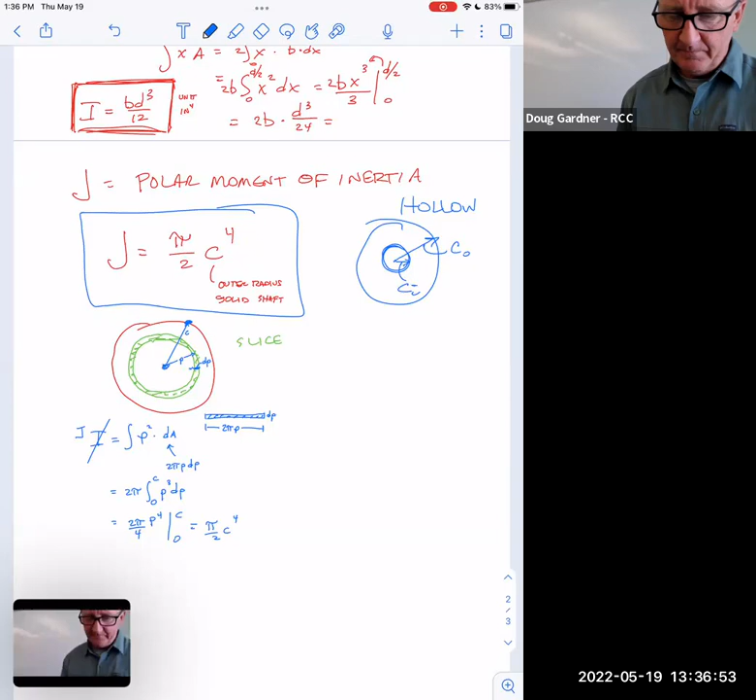Let's start. Now, armed with those two formulas, let's see if we can get some problems correct.

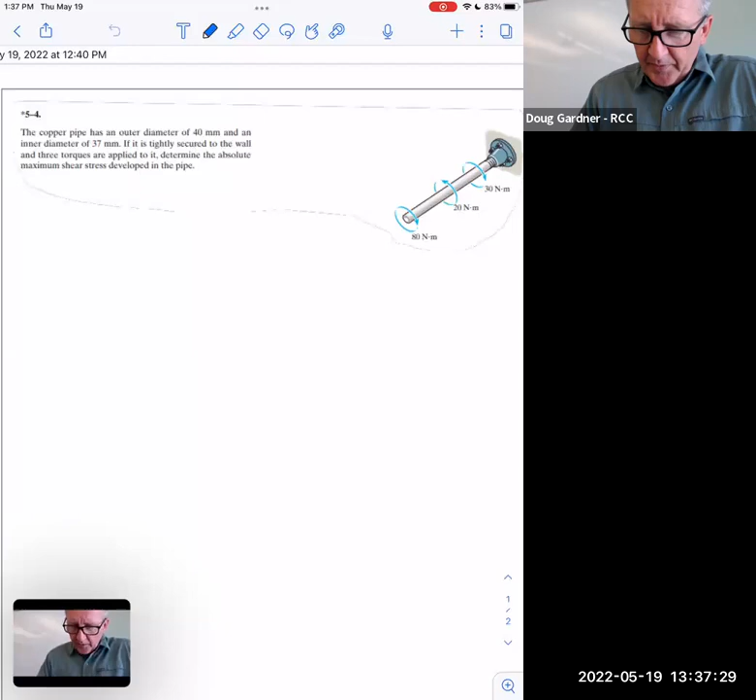So you have this one in front of you. The copper pipe has an outer diameter of 40 millimeters. Notice it's like a pipe screwed into the wall, with an inner diameter of 37 millimeters. It's tightly secured to the wall, and 3 different torques are applied to it. Determine the absolute maximum shear stress developed in the pipe.

Now, again, at a glance, doesn't that look weird? How would there be 3 different torques? I can imagine somebody putting a pipe wrench on it somewhere and torquing it down, but how would you have 3? Are there 3 people competing with each other? Well, we can argue about that, but whatever—let's stare at the sections of this.

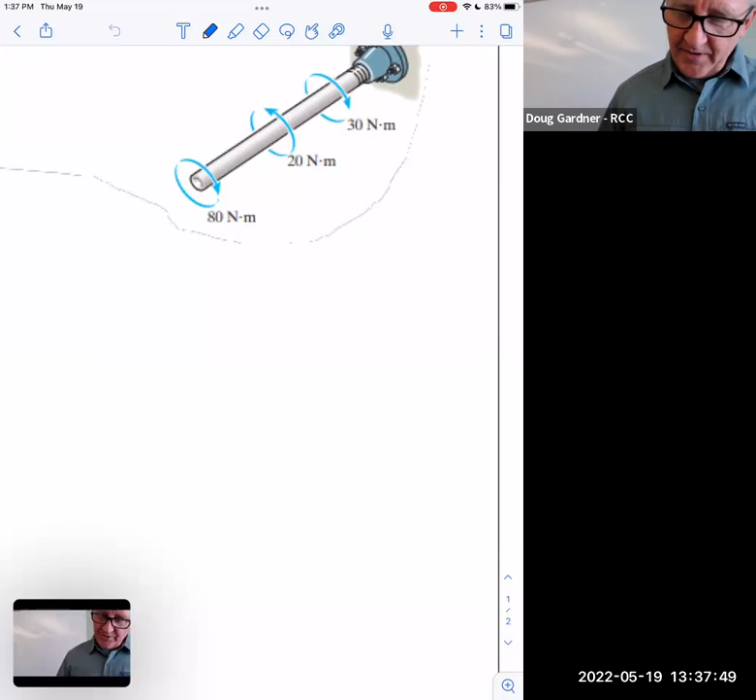Would you agree that everything in here is 80 from the previous section? If I section just that part, all of the metal that's in there thinks it has 80 on it. Do you agree with that? But what does this stuff think? What do those people think?

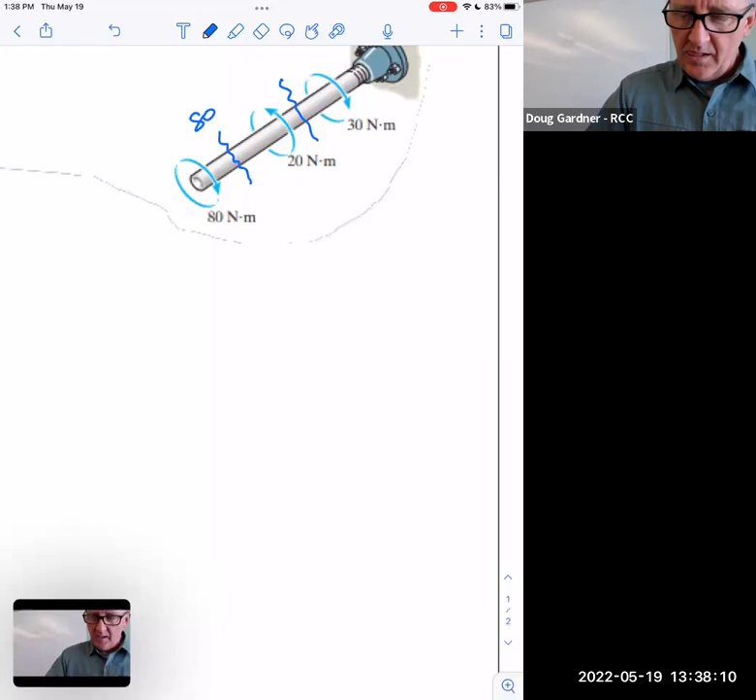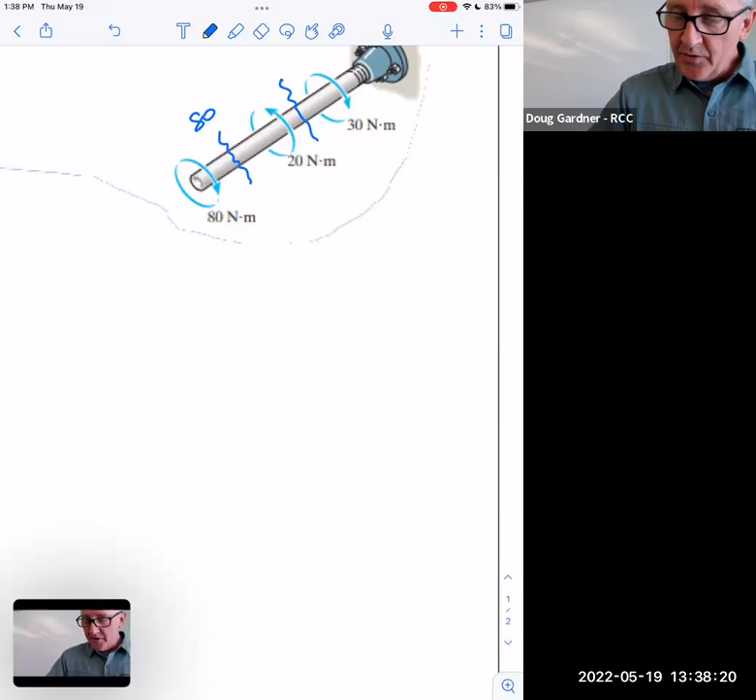Like, 80 minus 20, yes. Notice they're going opposite directions. If they're going the same direction, it'd be 100. If they're going different directions, it's 60. So actually, that part of the pipe isn't wanting to twist near as bad, right?

And then what about the one at the end? What about this last section over here? What's it think? 90. 80 minus 20 is 60, plus 30 is 90. So notice that section actually is the one that's going to break. Does that make sense? If you twisted it hard enough that the metal just went and folded, that's where it's going to break. Do you agree with that?

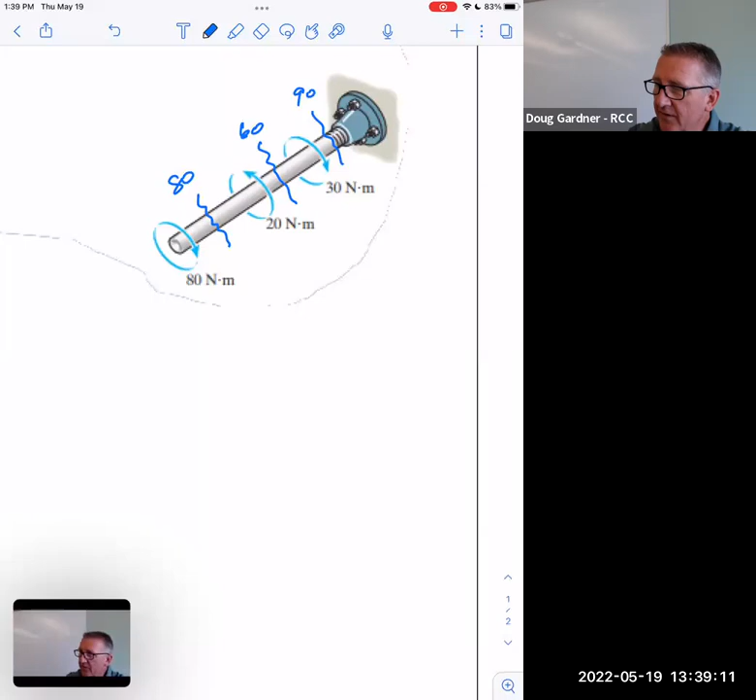So when I was looking at this, I just kind of assumed this pipe was going to have different values—like in between the 80 and the 20, that pipe, the inners were going to have like 60, and then in the 20 and the 30, it would have like 10. I thought the pipe was going to act differently. In other words, the 30-20 area doesn't know 80 exists. And that's not obvious at all—I could totally see that being the case. So the pipe kind of acts as one, but because it's connected, it is working its way through over there. So yeah, that's not obvious at all.

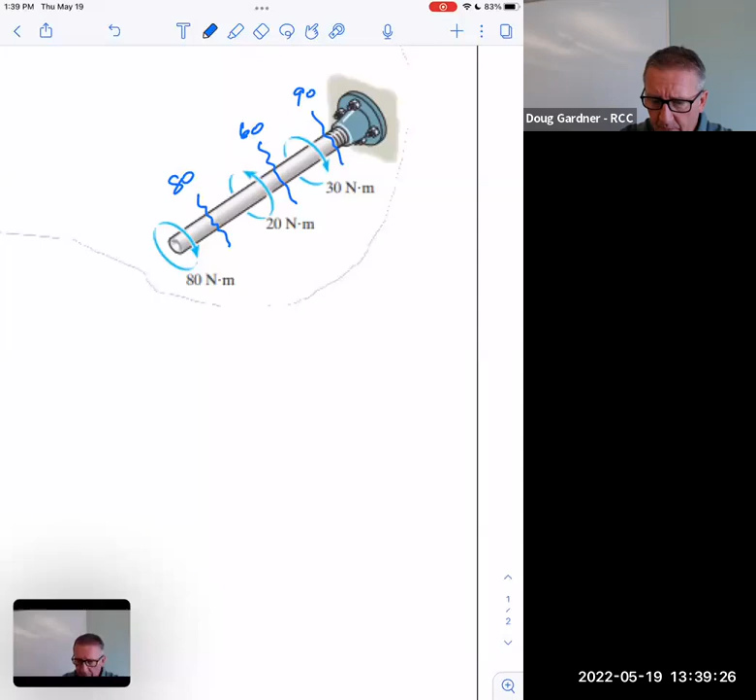So notice what it asked. Yeah, that's exactly right—because of that, it's going to break somewhere in here. Now, assuming the threads made it skinnier through there, you'd think it would break where the threads are. Does that make sense? Because the radius of the pipe is actually kind of screwed up in that section. They're asking us to ignore that. But if it's going to break, it's actually going to break somewhere in here, because it's the same pipe all the way through, and that's the place that has the most torque on it.

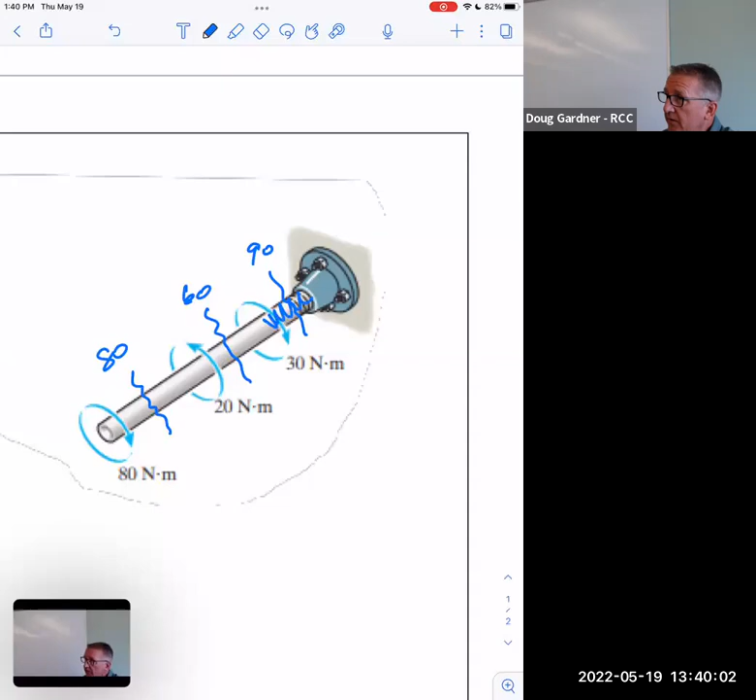So kind of like a gruesome thought, but I was just thinking if you held your arm out and someone twisted it this way, that way, exactly—this way, it's going to break at your shoulder. That's weird, I just wouldn't think that. I don't want to think about it. Well, think about it—no, that's good, because basically you're out here doing 80, right? And your shoulder is wanting to break because it is fixed there, right? Now, is it going to break? Do you see how my arm is able to rotate without my shoulder changing? That's exactly what material can do. Good, it didn't break over here.

It's good this wasn't super rigid, right? Don't I want this to be nice and rubbery if I want to bend this? So notice it's having to twist to do that. But if I keep going, at some point it is going to break, right? Where is it going to break? Where it's attached. Okay, that makes sense. So it doesn't matter how many extra forces there are, the overall force happens at the attachment point.

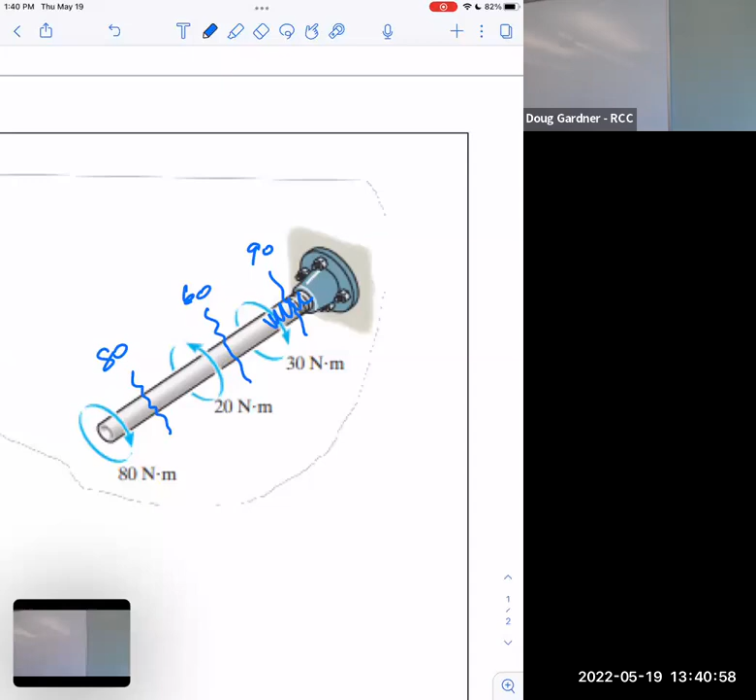So if I'm over here and I'm about ready to break your arm or whatever, then somebody else comes in and says, isn't that helping? Your arm's about ready to break off, and somebody comes and says, now this isn't going to break—because I'm pulling back, right? So now it's only 60. It was 80 and 20 got released. Now it's only 60. Ooh, it feels like relief. Now, could it break in there?

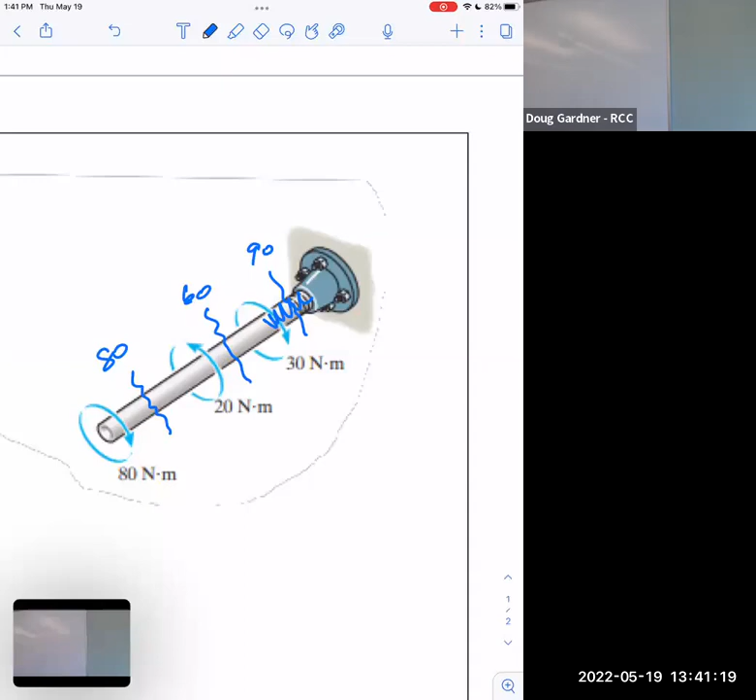Sure, yeah, that's what I was thinking. I thought it would break right here, between the 80 and 20. There's a part of me that looks at that and says, isn't that 100 then? Because it's like, if it's 20 going one way and 80 going the opposite, it felt like 100 on my arm. It felt like it was more. Like that doesn't feel good, huh?

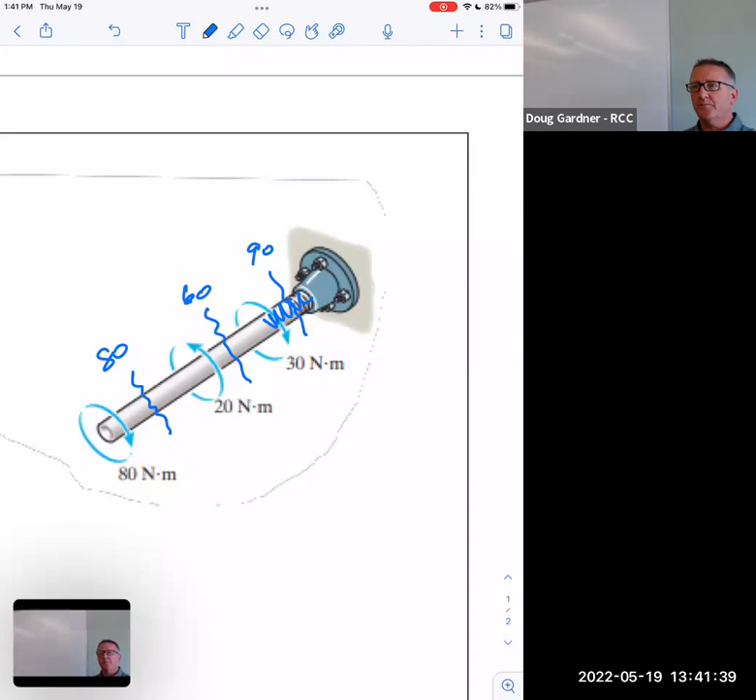Yeah, but then if you just like... Yeah, well, I know, but it's less. Okay, I'm sorry, that makes sense. No, this is good. This is exactly what we want to do. We want to reason about this.

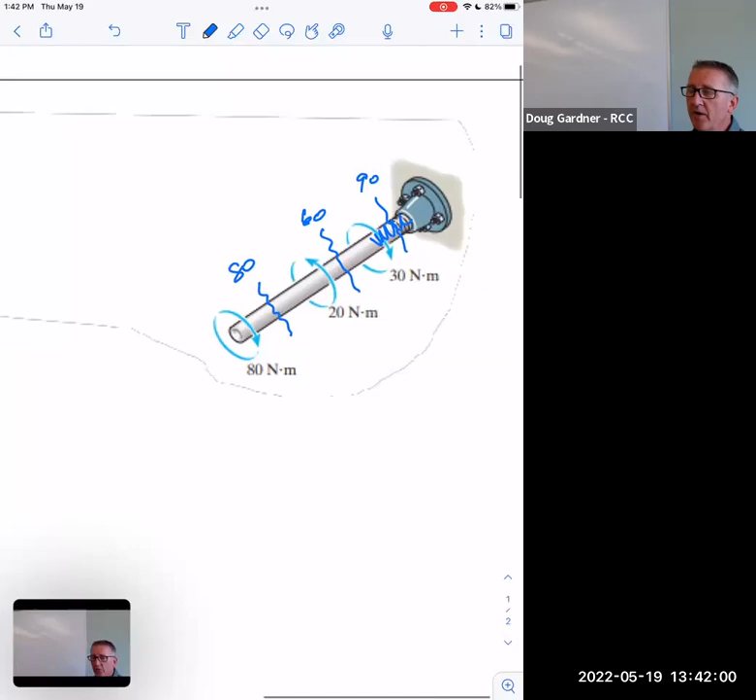Because this said here, the key word is maximum shear stress, then we have to look at this pipe and say, well, where's the biggest torque possible? Remember, our formula is just that the shear stress is equal to torque times C divided by J. And they only wanted the maximum. They didn't say, I want all of them. They just said give me the maximum, which makes sense because the maximum is what's going to cause this to break, right? So because of that, I only have to do the 90 because it's the biggest one there.

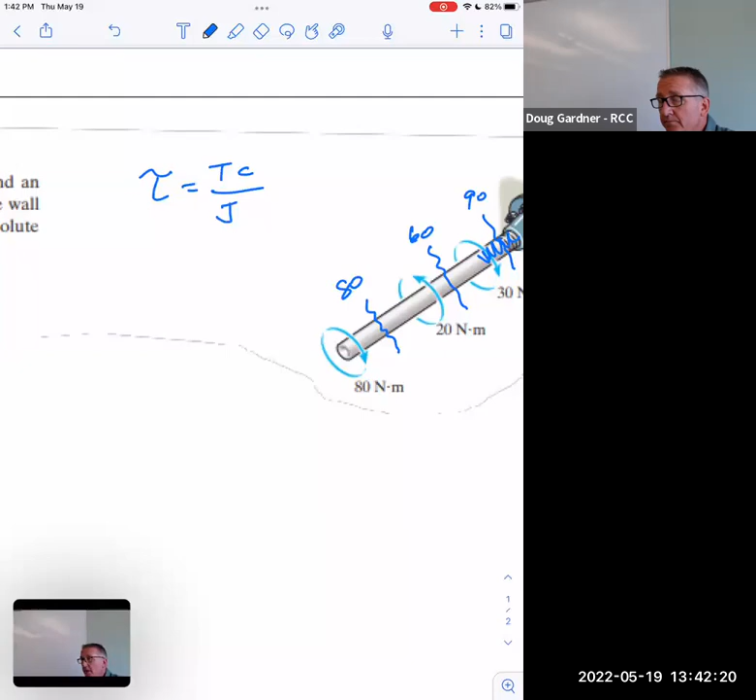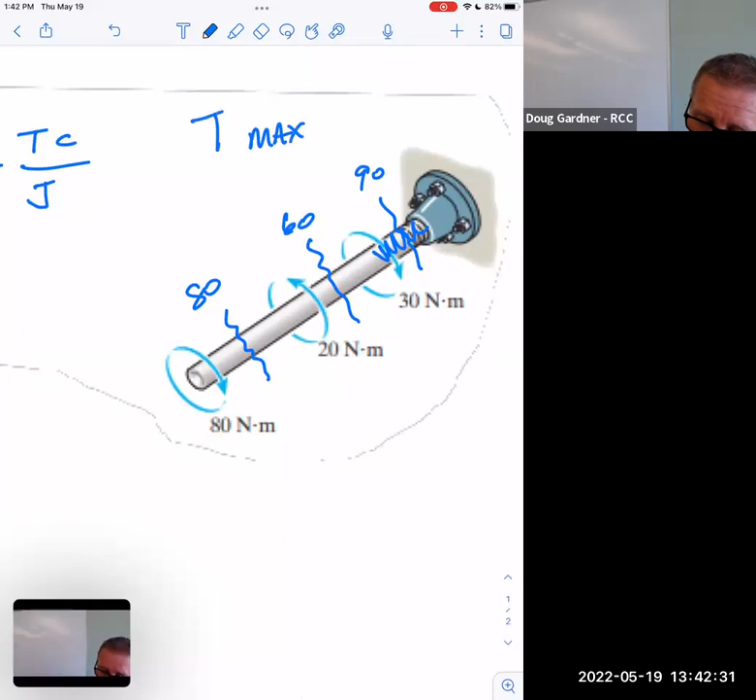So I'm making a note to myself. This is the T max based on the sectioning concept.

And I am interested that you see this as the same thing we did before. Before we were sectioning up our pipes, but it was always axial forces that were pushing and pulling on it. Well, it's the same thing here. It's just now they're twisting forces that are pushing and pulling it, but we're still having to section it to see what's happening to each chunk.

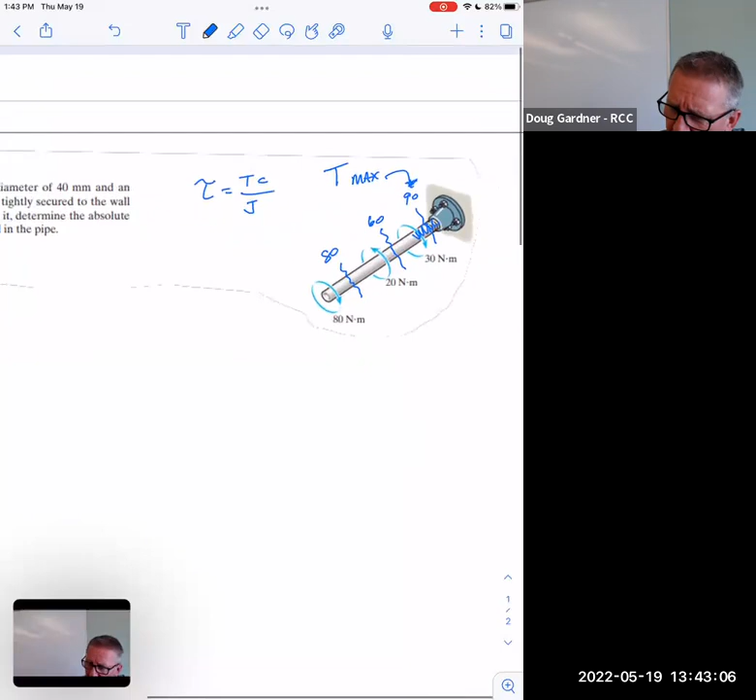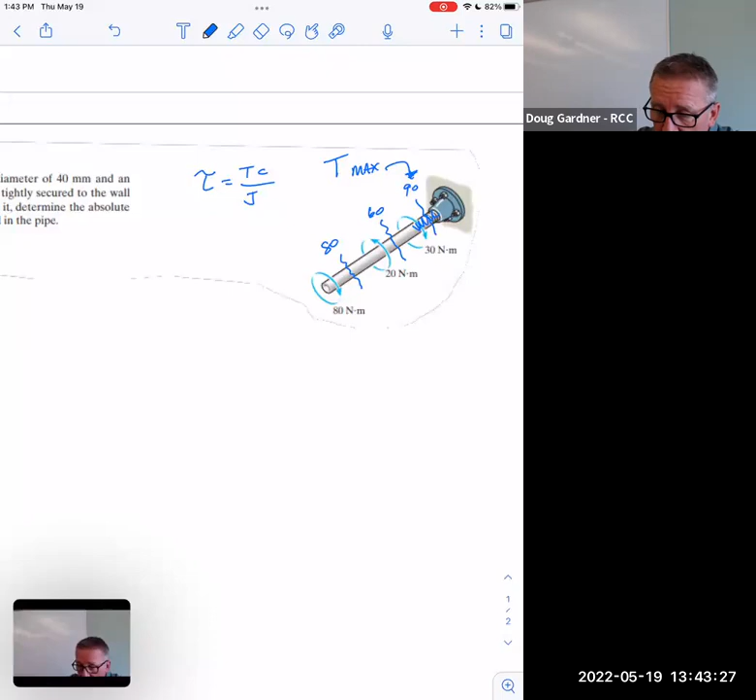Is that PSI? No, I'm sorry, what's the units of that? Love it, wonderful question. So because it's torque, what do the units have to be? Torque is a force times the distance, so it's either Newton meters or foot-pounds. In this case, I see metric, so it's Newton meters. That makes sense because it's a force times the distance. So I don't know what the force and the distance are because they just already multiplied it out for me. They just told me it's 30 or 90 or 60 or whatever.

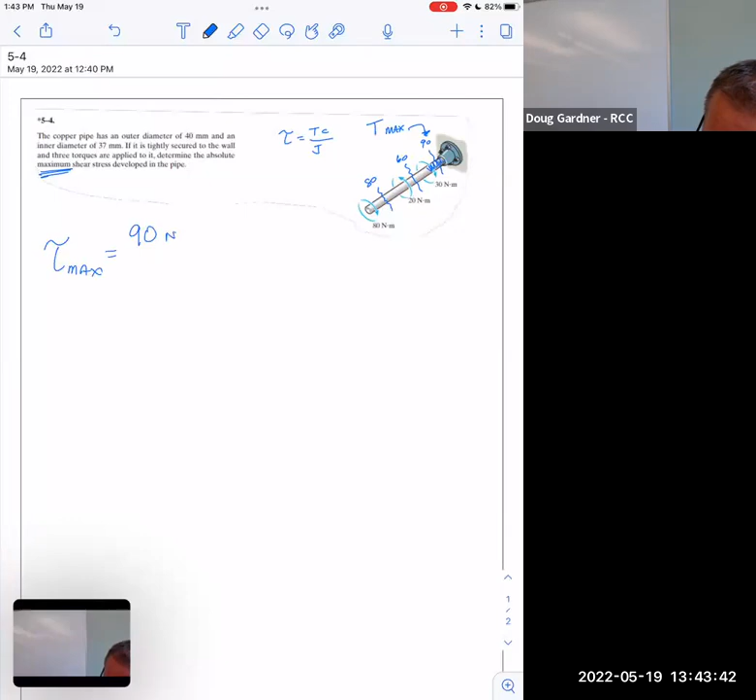Okay, so because I'm after max, then cool. Notice the formula says tau max is what this formula is designed to do. So I have 90, and of course, because this is early, I feel like I better leave Newton meters in it to kind of see what my units will be in the end. So I have 90 Newton meters. C was, again, the maximum radius, right? It wasn't just any old radius. It was the maximum radius.

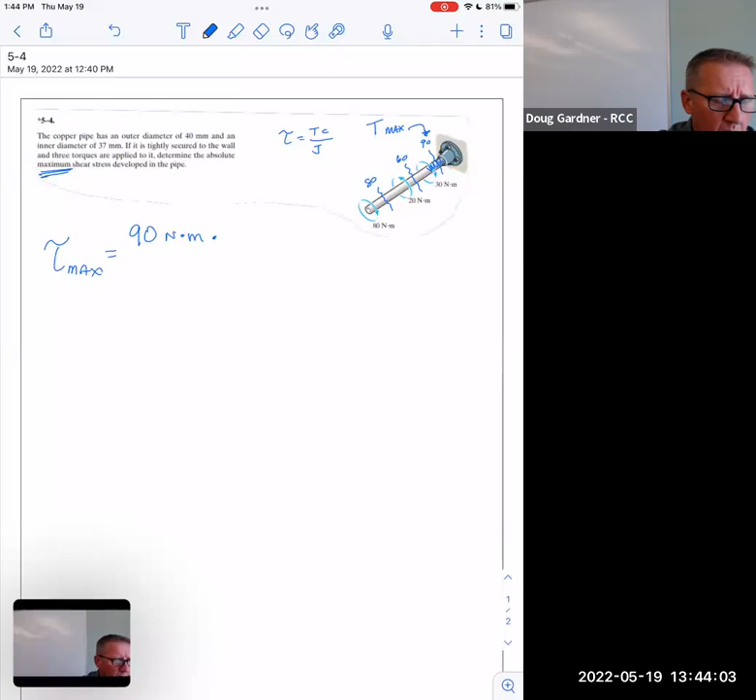That maximum radius, we were told, even though this is hollow, this is, well, it's not 40 because that was a diameter, but because the diameter is 40, then the radius is 20, right? And so even though this is hollow, that C is still a C. It's still maximum, it's the outer edge, because that's where the most torque is going to be, whether there's a hole in the solid pipe or not. So that's 20 millimeters. Now, again, should I leave it 20 millimeters or because the other one's in meters, should I turn this into meters? I'm not really sure, I think I'll just call it meters for now. We'll see if that was a good idea later on.

So I changed 20 millimeters to 0.02 meters. And then I'm dividing by J, right? But what is J? Well, in this case, because it's hollow, does it make sense we need that second formula? J, what is J? What is the second moment of inertia? What is this shape? What is this shape's desire to not rotate, if you will? It's pi over 2 times the outer radius, which was 0.02 meters raised to the 4th power, minus the inner radius.

Oh, that's terrible. What's half of 37? I guess that's 18.5. And then if I move the decimal point 2 places to the left, I guess it's 0.0185.

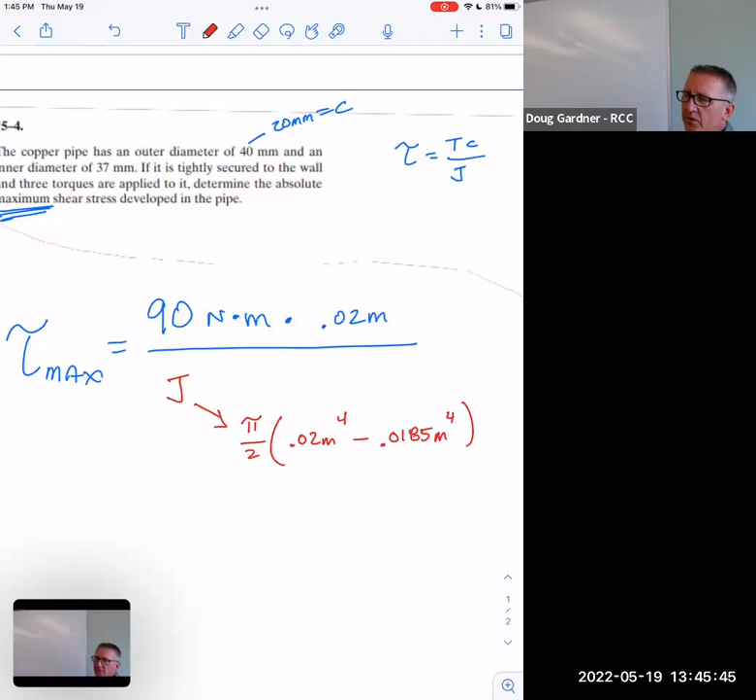Now, before we do this, though, stare at the units of this. Can you tell what the units are going to be? The bottom is meters to the 4th, the top is Newton meter meters. So what's the unit of the answer to this going to be? Meters squared, Newtons over meters squared. You agree with that? Because there's 4 meters on the bottom and 2 on the top. Do we have a name for that? Have we seen that before? Is it Pascal? No, yeah, Pascal.

This is clear back on your first notes, actually. PSI is pounds per square inch, so force on top, length squared on the bottom. In metric, force is newtons, and this is a Pascal. Since that's a crazy unit, somebody renamed it, but the units are newtons per square meter, which is just pascals. This is a unit we saw before, listed on your first note sheet back when we learned about shear stress in the first place. So that actually makes sense that that'd be the case.

Now all I gotta do is just punch those numbers in. 90 times 0.02. Again, be careful dividing by pi over 2, because that's really actually dividing by a fraction, so you're really multiplying by 2 over pi. It'd be easy to type this in wrong and screw it all up.

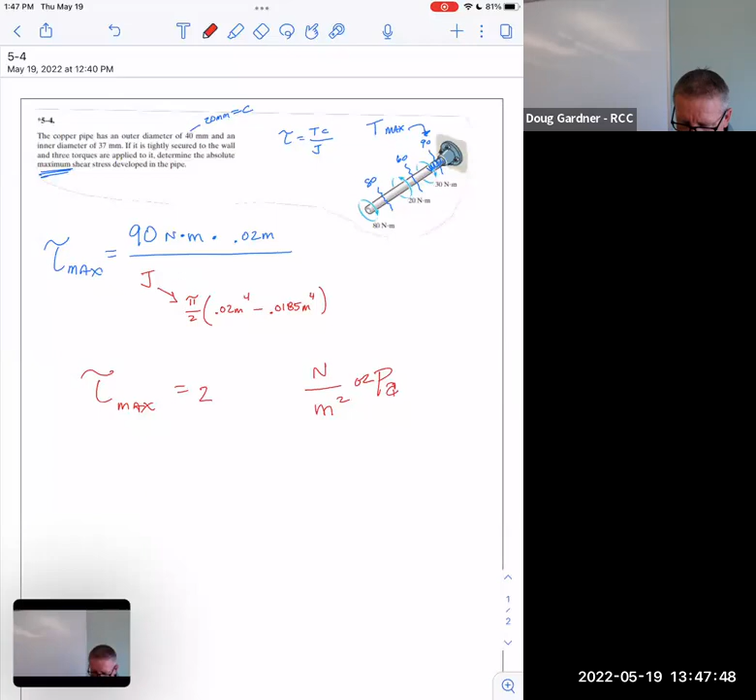If you don't get this wrong, you actually get... I guess I'm going to have to type it in because I wrote Newtons per meter squared. I'll give you a second to think about it. 90 times 0.02 times 2 divided by pi, divided by parenthesis 0.02 raised to the fourth minus 0.0185 raised to the fourth, close the parenthesis. I got 26733168.

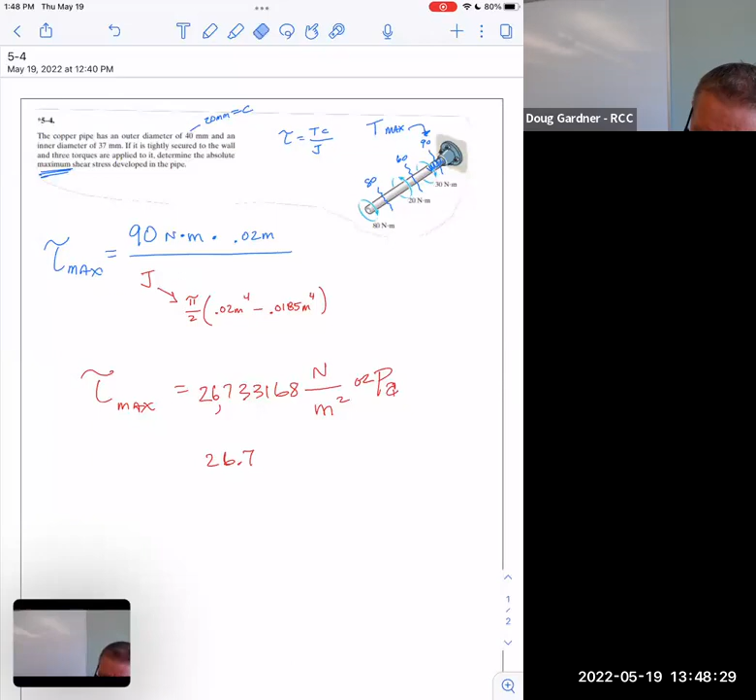What's the back of the book going to say for this? 26.7... oh, it'd be 26.7 megapascals. Is that it? Yeah, is that right? We're missing an 8, 3. I'm missing an 8, there was an 8 there. Yeah, so 26.7 megapascals. So we moved it 6 places, which was mega. That's what you'd see in the back of the book, but these are both correct, right?

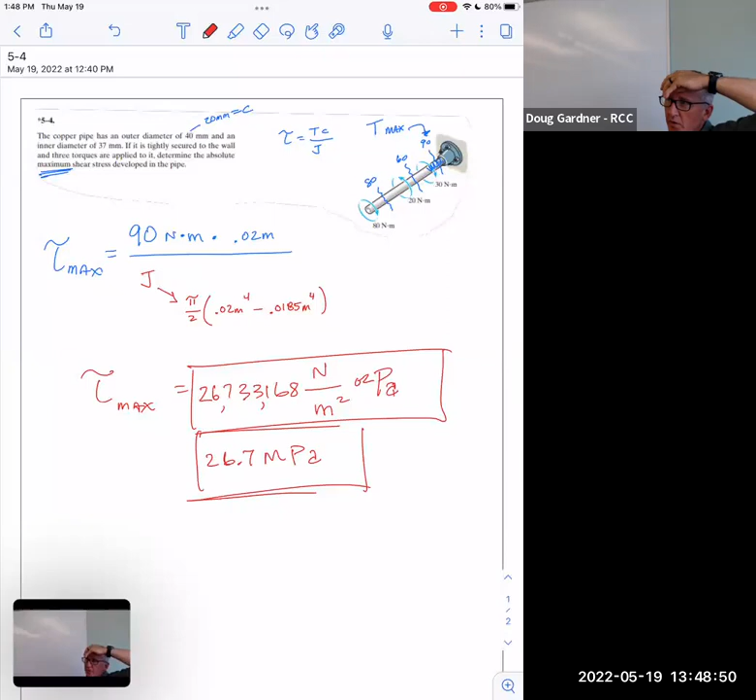Now, can you appreciate material? Because we converted this not to newtons, not to a force, but to newtons per square meter, does it make sense if this is something you could look up? Like how much, if you twist on something, how much torsion can A36 steel handle? Keep in mind, it doesn't even have to be torsion - it's just how much desire to slip one piece past another piece. How much of that can A36 steel handle? Is that something we could look up?

Interestingly, I think if you look in the table, it's not one of the options. Well, or it's an option, but there was nothing there. It would be shear, right? Yeah, it's like there's a spot for it, but they didn't put anything there, which I don't know why. I just discovered that today. I was like, what? Is that because it depends on the thickness, maybe?

I don't know. There's one problem we're going to do in a few minutes where they told us the value of that, and I thought, well, why didn't we just look that up? Because it said it was - I looked in the back and it wasn't one of the options. There was one homework problem that gave us a value for aluminum, but I was looking at it at the back of the book and it was a different value. I got furious because I was working on it for like an hour and couldn't get it right - because I used the one in the back of the book. Oh geez, yeah, that's super frustrating.

But the cool part of this is somebody put some twist on it, just like I did on Connor's arm, and of course it wants to break. So we took all of this and turned it into a desire for two pieces of metal to slide past each other. Keep in mind, just because it's rotating doesn't really change anything - it's two pieces of metal sliding past each other. It's no different if it's straight sideways than if it rotates. The only difference with rotation is the middle ones aren't doing any sliding past each other, whereas the outer ones are sliding wildly and the middle ones are sliding a little bit. But other than that, it's just metal sliding past metal, right?

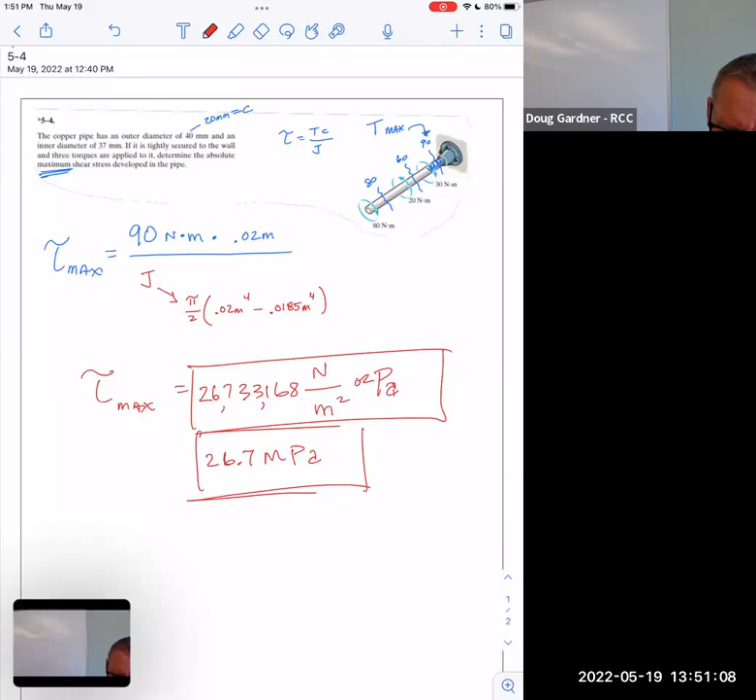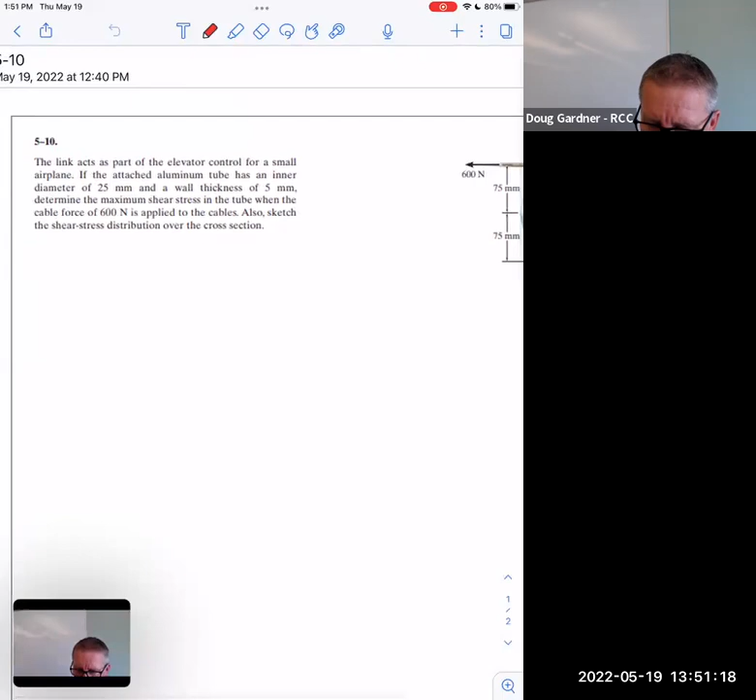Let's take a look at this one. This is exciting to me because this is a control for a small airplane. This took me a second to figure out, so let me highlight a couple things about the picture so you understand it.

Notice there are 600 newtons pulling in this direction on a cable and 600 on this. What is that accomplishing? Do you see there's a pipe right here? It's hollow, and by implication the pipe is kind of looking like that. So this is going to cause the pipe to rotate. Does that make sense?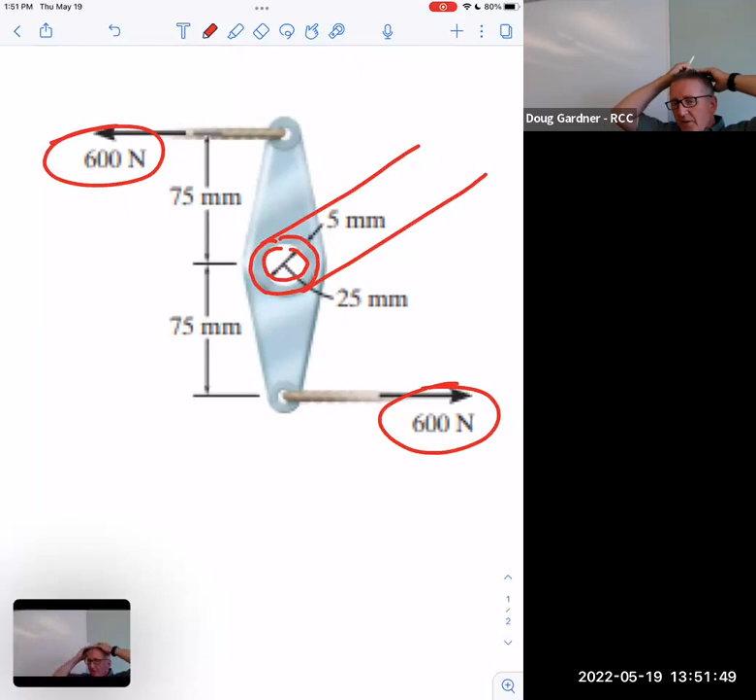Now why would that be in an airplane? Well, that's the elevator in the back of the plane, the part of the tail that goes up and down. That's what's happening right there. I need the tail to go up and down, and it's got a lot of wind pushing on it because I'm traveling 100 miles an hour. It's going to not want to do that with wind pushing on it. So that's a neat practical example of something that really does need to rotate in the real world.

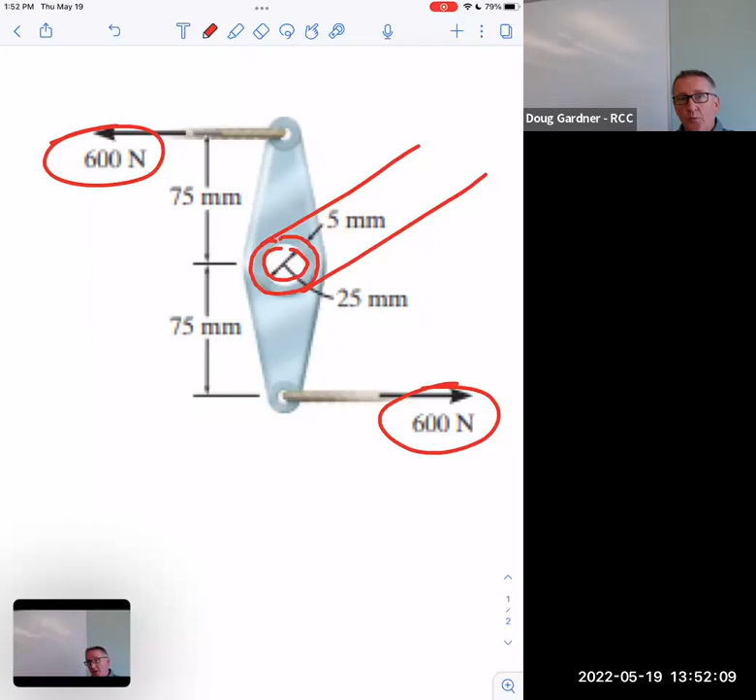Doesn't somebody have to pick that piece of cable right there? And isn't that an axial load on it? Based on the last chapter, could that snap in half when you put 600 newtons on it? Yep, let's make sure to pick the right cable so it doesn't snap in half.

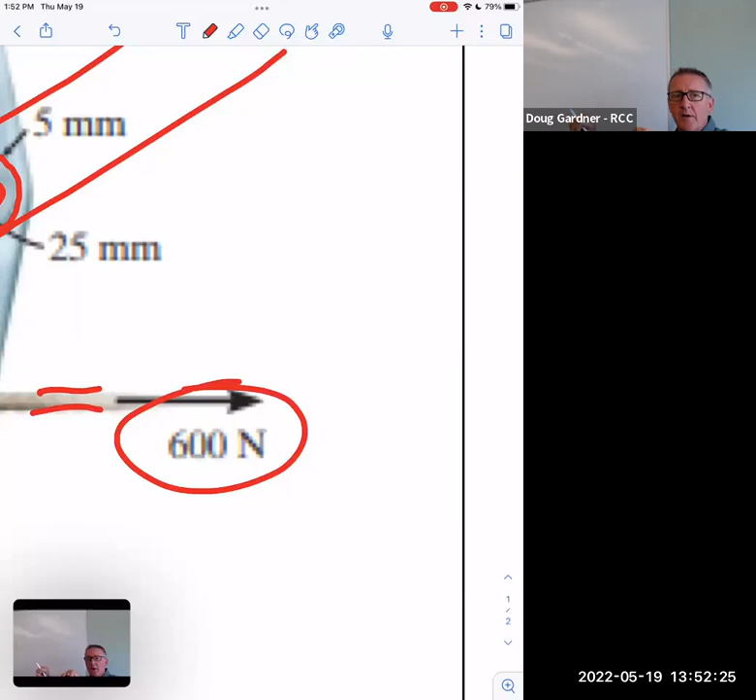Now that it doesn't snap in half, could we take that pipe right there and just twist it in half? That could happen too, we don't want that to happen. So in chapter 5, let's choose some material that doesn't let that happen. Isn't this kind of cool? This is like fly the airplane, kind of interesting.

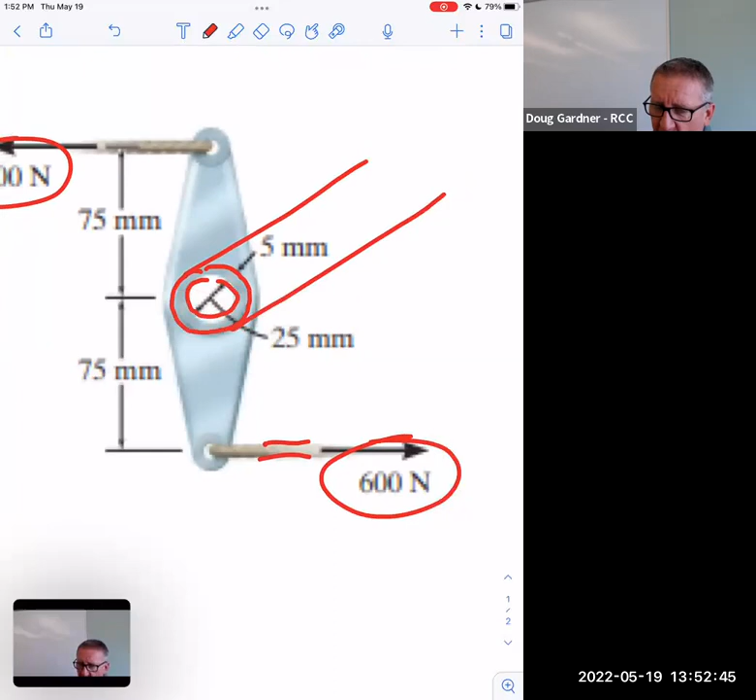Okay, this is like the last problem. It's a hollow pipe, so this doesn't feel that much different. However, notice they didn't tell me a torque here. They didn't say the torque is 90. This time we're going to figure it out ourselves because we know torque is a force times the distance, and we have a force of 600 newtons, and we have a distance. So can we find the torque?

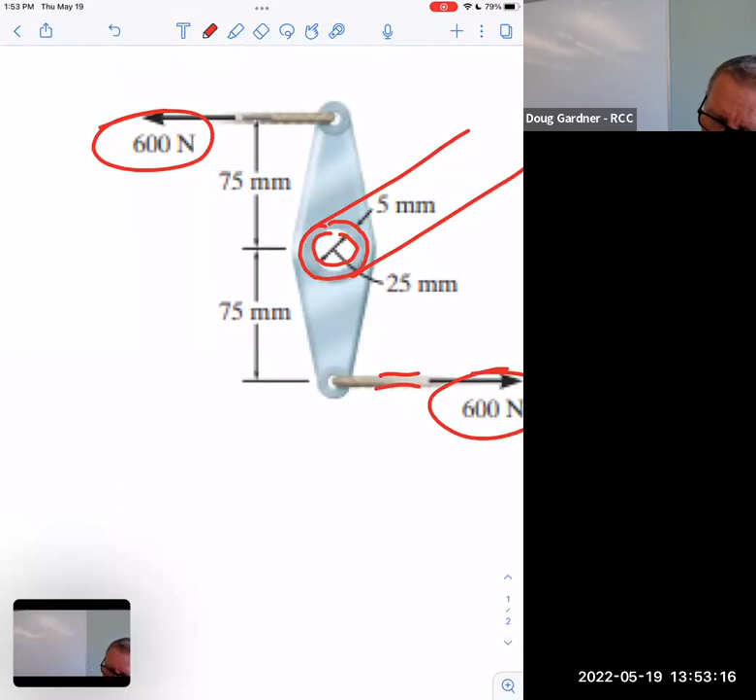I want to give you a second to think about this, stare at the picture. Can you find the torque? It might be nice to note, as I draw the center of that circle right there and call it A, what we really need to know is the torque around A. This time it's not just a given, because torque very seldom is something twisting on someone's arm, it's caused by something like this, a force and a distance.

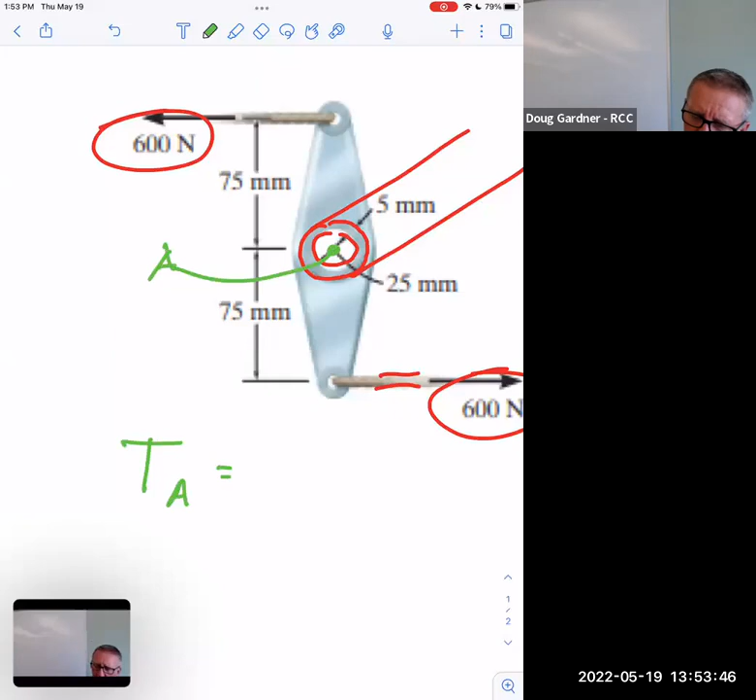Would it be times 2? Isn't that a wonderful question? It's not obvious, is it? Do I have to do this twice, or do I do it once? Your book, and I did not emphasize this a lot but this was back in statics, calls it a couple moment. That is a really strange use of couple moment, seems like that should be boy-girl stuff. Not for engineers, what's a couple moment?

When those two forces are identical, and they're also the same exact distance apart. And the answer to the question is, yep, you got 2 of them there, but the good thing is they're the same, so you do 1 and double it.

Are the units good? Yeah, like a minute ago we ended up with newtons and meters and stuff. So part of me thinks we shouldn't leave that 75 millimeters alone, we should call that 0.075 meters. And yeah, that's true.

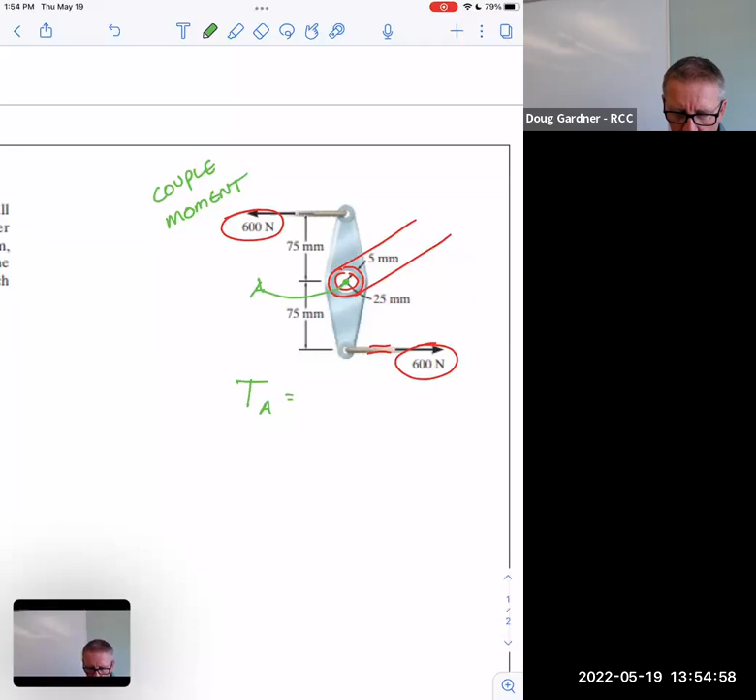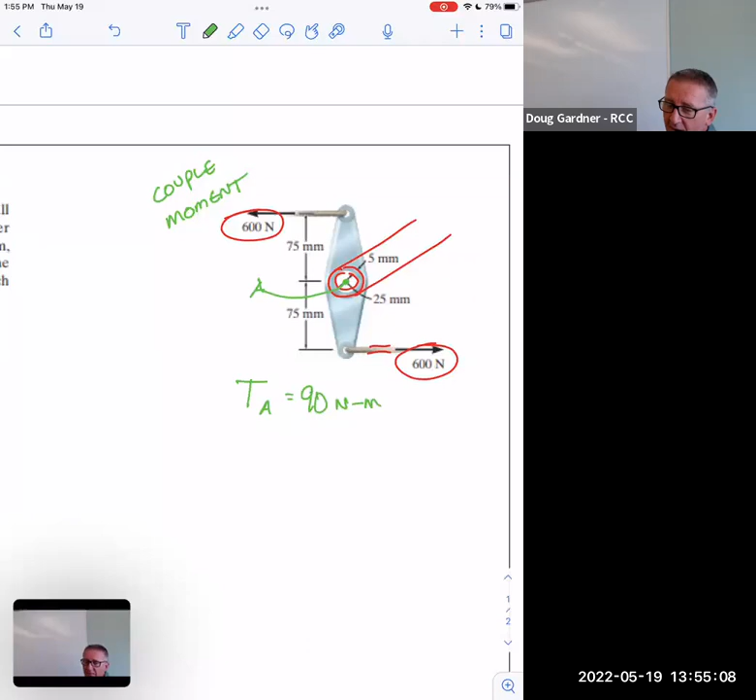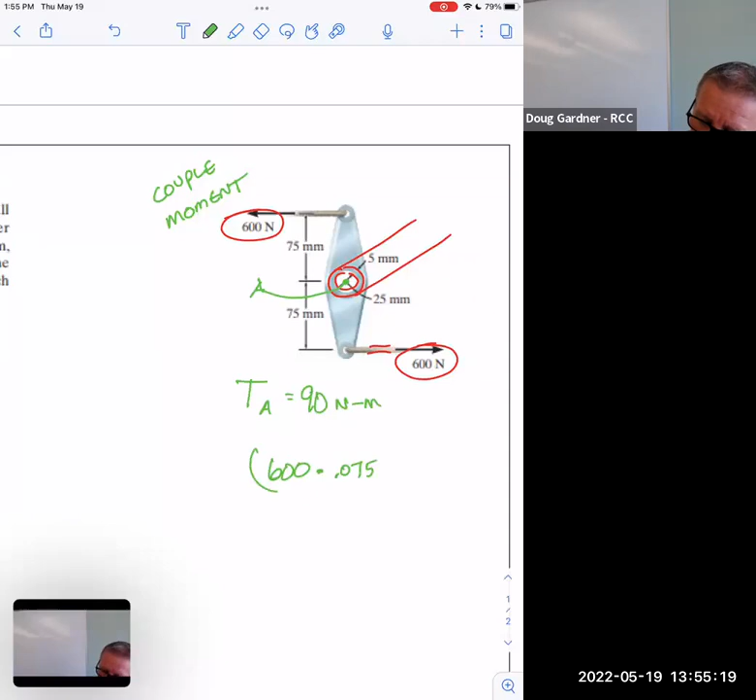So if I take 600 - and I want to emphasize something here I did not emphasize in class before - if I take 600 times 0.075 times 2, I get 90 for that. Do you agree with that? Yeah. Now the shortcut of this is when I just multiplied by 2, I was thinking of it as 600 times 0.075, and then that was one of them, and then times 2. Do you understand that? But stop and think about this.

Because algebra is commutative and associative, meaning it doesn't matter what order you multiply things.

As a shortcut. Now, I don't like shortcuts because it's already hard enough for me. I can figure this out based on logic, so don't give me any shortcuts. My brain is already full. But that was a whole section in statics that I kind of glossed over. You may remember seeing that word, like oh, there's a couple moment here. It's like, what does that mean? I don't get it. That's what's going on.

So yeah, now we found our torque. It wasn't given to us, but we made it for ourselves. Great, well now we're on our way. The rest of this problem is like we just did, as long as we understand that this thing is hollow.

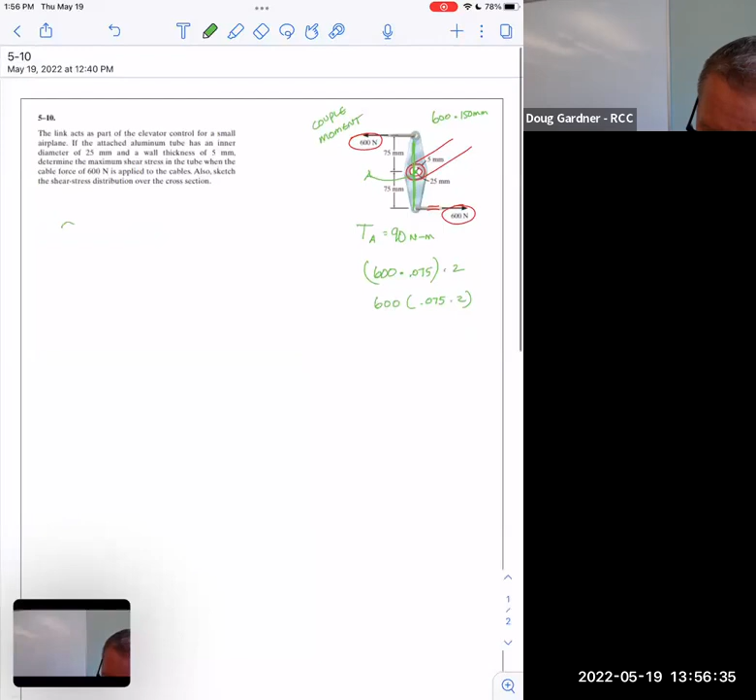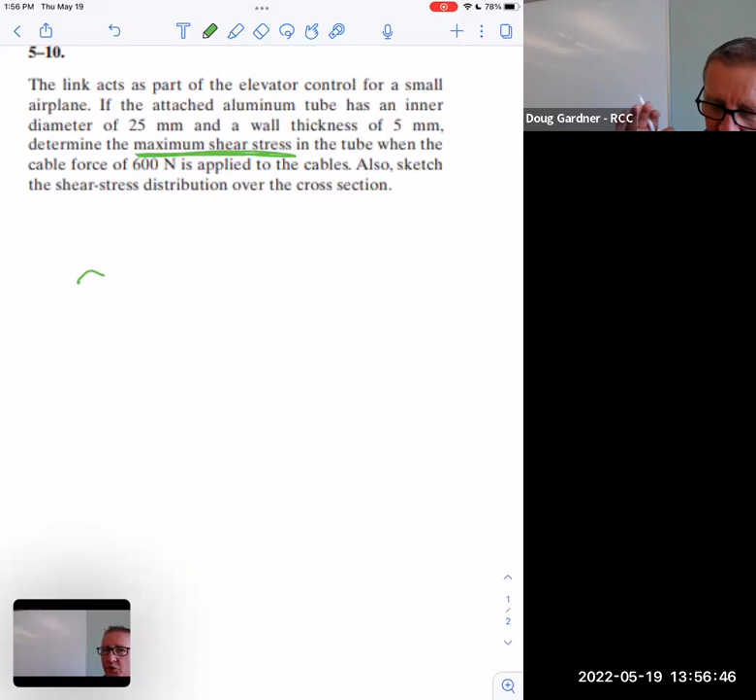So I say, okay, what did they ask me for? Did they ask for the same exact thing, like the shear max? They said determine the maximum shear stress. Oh, maximum. Okay, they didn't say somewhere in the tube. They said maximum. Okay, good.

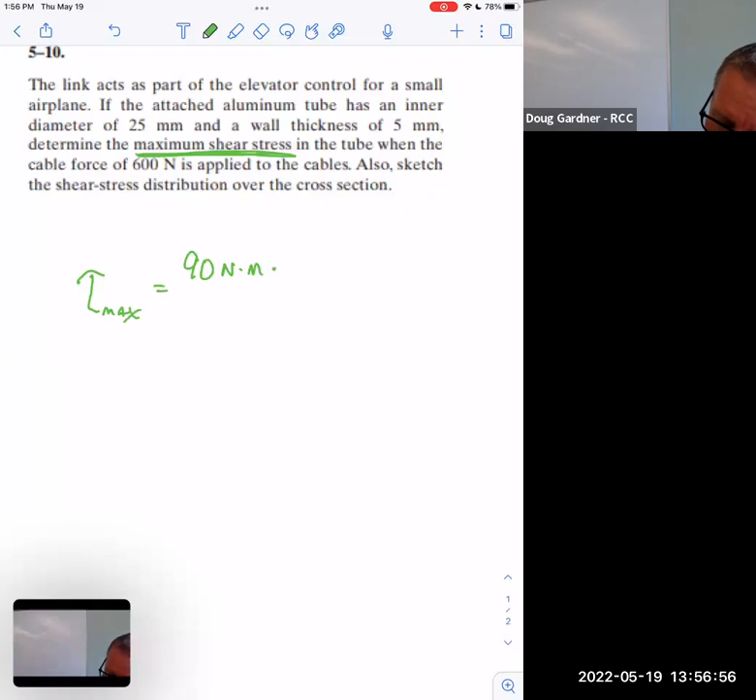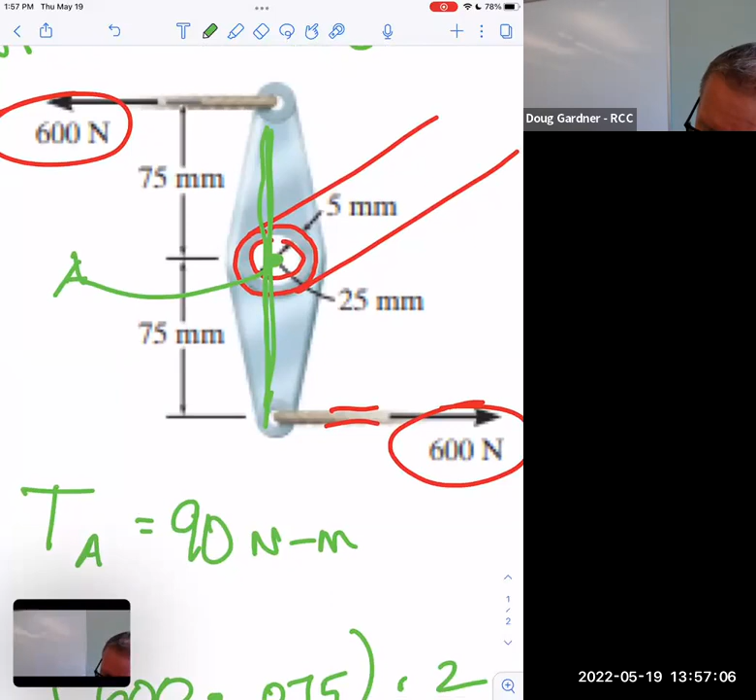That's what my formula is made for. Tau max we said is equal to the torque, 90 Newton meters, times the outer radius. What's the size of the outer part of that pipe? 30. Notice 25 is the diameter of the inner pipe, right? And then there's 5 more. So it's really 12 and a half plus 5. It's 17 and a half.

It's not obvious, is it? Or you could say there's 5 over here, 5 over here, and 5 over here. So it's 25 and 10. It's 35. The diameter is 35. And then I cut that in half. It's actually radius 17.5 millimeters or 0.0175 meters. Do you agree with that?

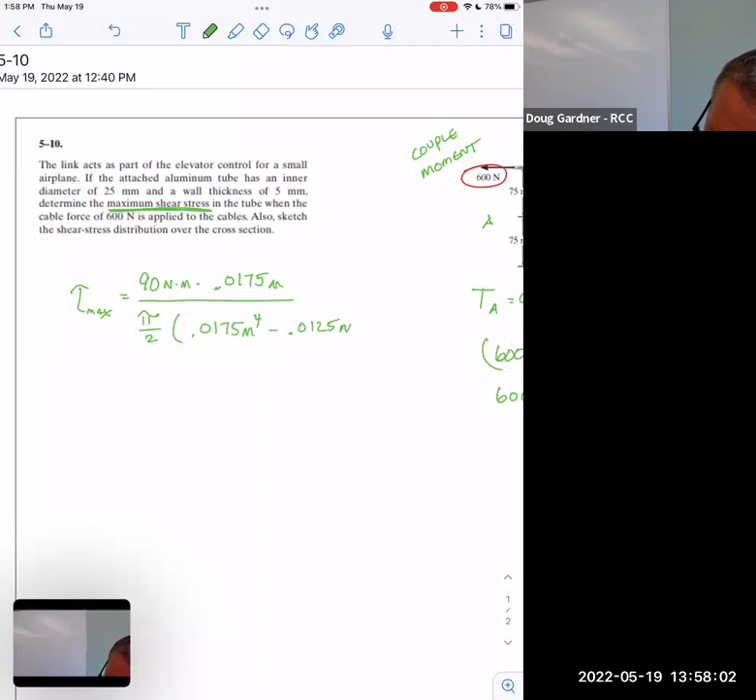And then on the bottom, our J value, just like we did a second ago, it's always pi over 2. It's outer radius, 0.0175, to the 4th, minus the inner radius. The inner diameter is 25, so the inner radius would be 0.0125, 12.5 millimeters. You agree with that?

And in the interest of time, that gives us a maximum value of approximately 14.5 megapascals.

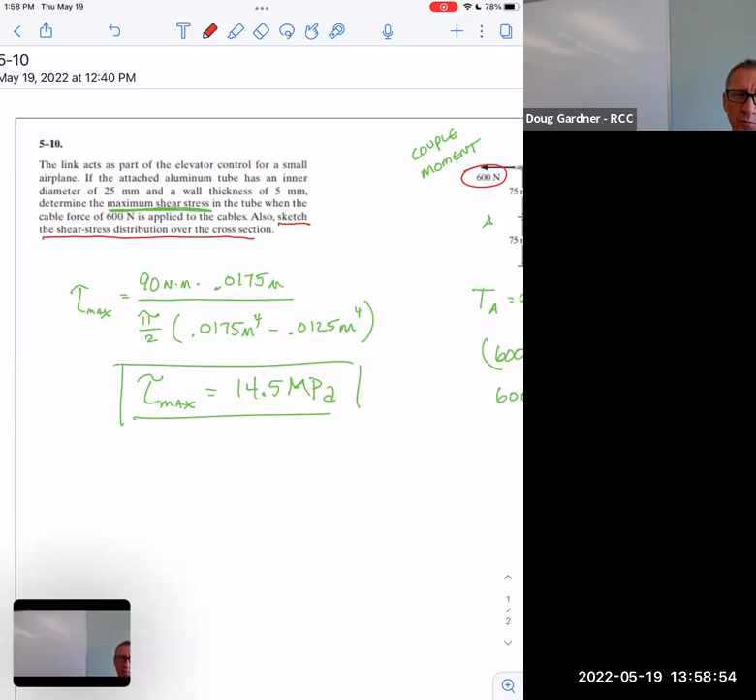But then they asked something, which didn't teach you very much relative to the previous problem, except for the fact that we had to find the torque ourselves. Notice it says also sketch the shear stress distribution over the cross section. You're going to see this question more than once. So what the heck is that asking? Well, what it's asking is this.

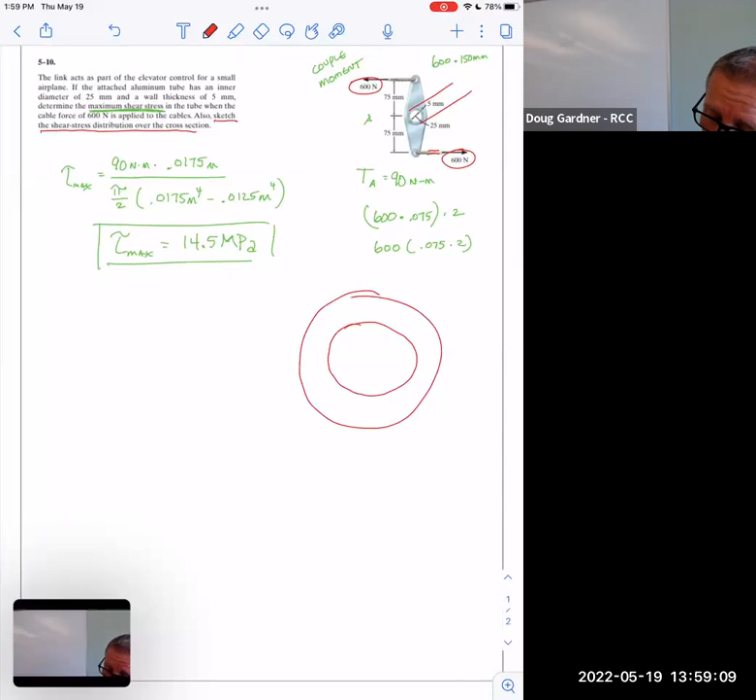What we just figured out is there's 14.5 megapascals of force on the outer portion of that pipe, right? Now what direction is it going? It's going perpendicular. So that's the 14.5. Now where do you draw it? Well, anywhere you want to. Draw it over here, I don't care, but the key is it's heading out perpendicular. Does that make sense? Kind of like pounds per square inch, newtons per square meter.

So acting perpendicular. Go ahead. We are finding the max shear stress by basically using the max radius. Yep. If we wanted to find the shear stress of the inner radius, would we just use that? And it would be like, oh, that's the max stress there. Here's the max stress for right at this moment. Yeah, did I pay you to say that? Because that's exactly what I was going to say. It's a wonderful question. So that's what's happening outside, right?

But what's happening on the inside? Now, of course, all the material is the same, and the inner part's going to be less. So there's part of me that says, who cares? Because if it's going to break, it's going to kind of break on the outside. Does that make sense? But well, in the case of the beam, though, the top fibers are working the hardest, but does that mean these aren't working at all? No, they're working too. So is there a way to calculate it? Yeah, so let's go calc that.

What about tau? We'll just call it tau inner, I guess. Is it any different? The answer is no, there's still 90 Newton meters of torque on it, because that was coming from way outside of it. There's still 90 Newton meters of torque, but what's the radius though? Is the location of the inner one still 0.0175? The answer is no, it's the inner radius, which was 0.0125. Does that make sense? And then the bottom part is identical.

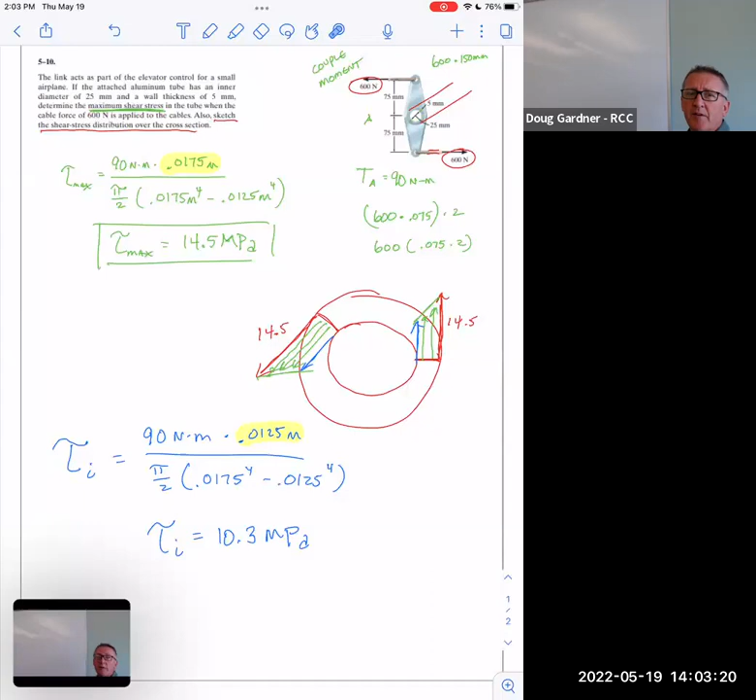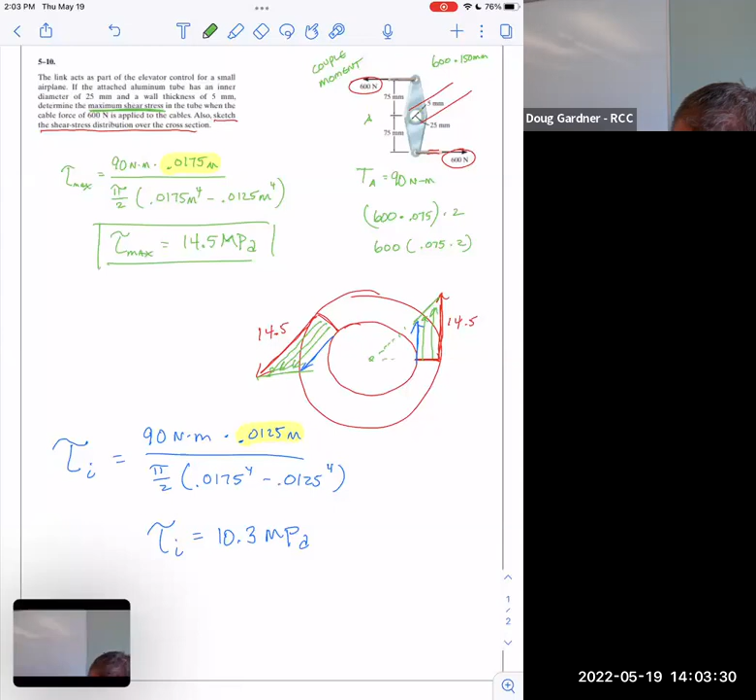So do you see the outer fibers there working harder? They're the longest lines. The inner fibers are working the least. If I kept on going, if this was solid, does it make sense it would go all the way to nothing in the center? In other words, this thing is actually emanating from right there. So because this is hollow, I'm done. But if it was solid, it just would have went all the way to nothing.

So the center has nothing until the outer fails, and then that force starts going towards the inner, and it becomes like a new equation. Right? Say that one more time. The inner has nothing as long as the outer holds. Because I was just thinking, like, if this failed, it's gonna shear right in half, right? Like the inner will fail. So once the outer starts failing, you kind of have a new shape, like one not as big a radius, and you start having force.

Yeah, I mean, it's kind of like every piece of metal in there is doing work. It's just the outer ones are working the hardest. But in the end, everybody has to fail in order for it to finally twist. That's exactly right. It's like there's an integral in there somewhere. Yeah, I mean, if you went toward something like, how much energy is required to do that, then it'd be like all of them added together. That's exactly right.

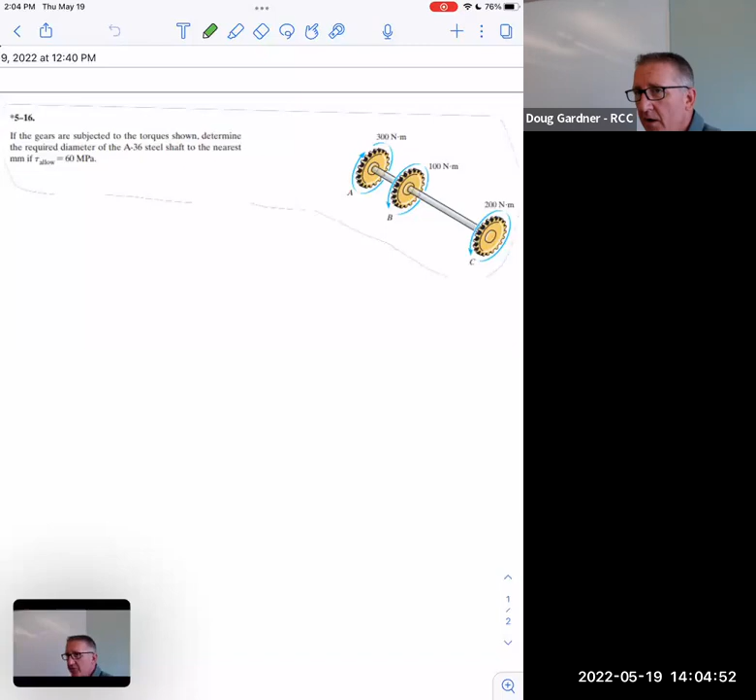So this is what I was referring to a second ago. Again, this is not hard. You're gonna look at this and go, this is totally easy. The only difference in this question is they're actually telling us, hey, I already chose my material. I already know the tau max, the tau allowable. I already know the number on the left this time. And so the question is like, well, don't twist it too hard then. So I don't want to twist this too hard so that it actually breaks. So this is, but it's the same exact formula.

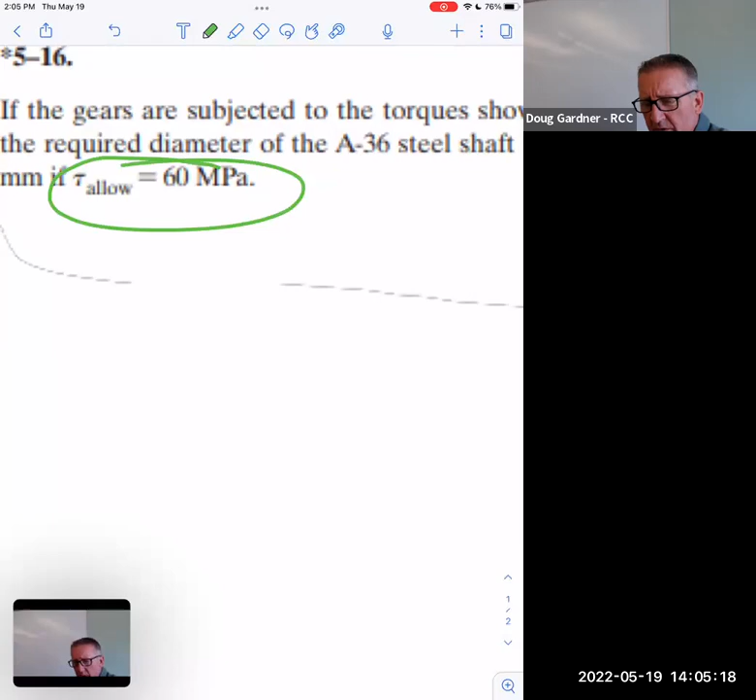Now, this is what I was talking about earlier. Notice they said it's A36 steel. So I thought, oh, let's go look it up in the back. That seems like allowable, the shear allowable would be something. Remember that allowable shear was on the beams I showed you on that cool website. And I looked in the back and it was like, oh, it didn't list 60 megapascals. I thought it was weird they listed it. And then I looked in the back and it wasn't listed. Now I don't understand. But because they gave us 60, then they didn't really need to tell us what kind of material it was, I guess.

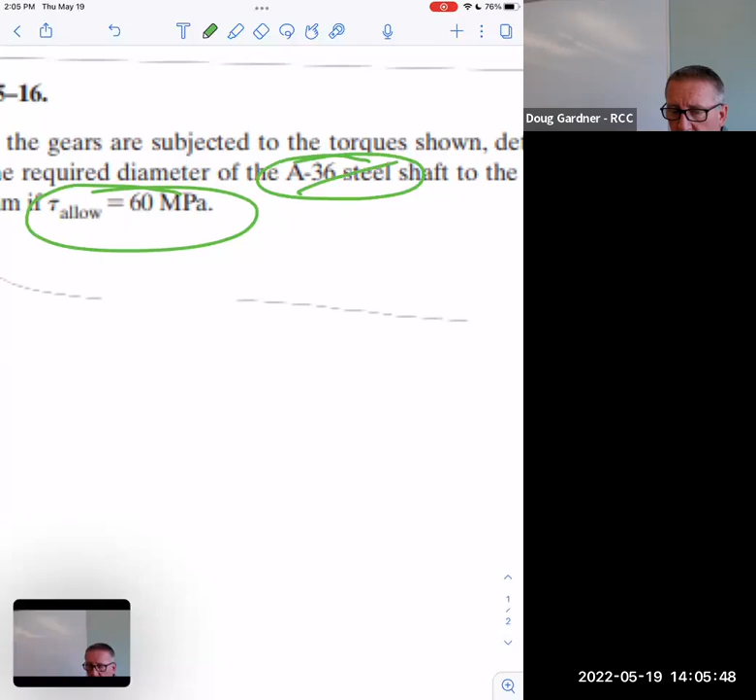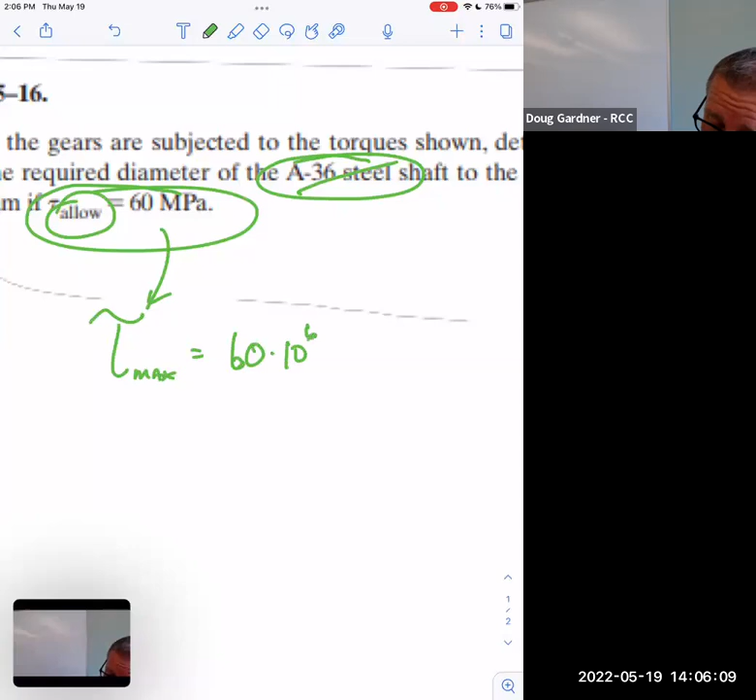Notice this says allowable, therefore I'm after the max here. And that's what 60 is. I'm thinking of that as 60 megapascals, or 60 times 10 to the 6th newtons over square meters, since that's a Pascal. And that equals T times C over J.

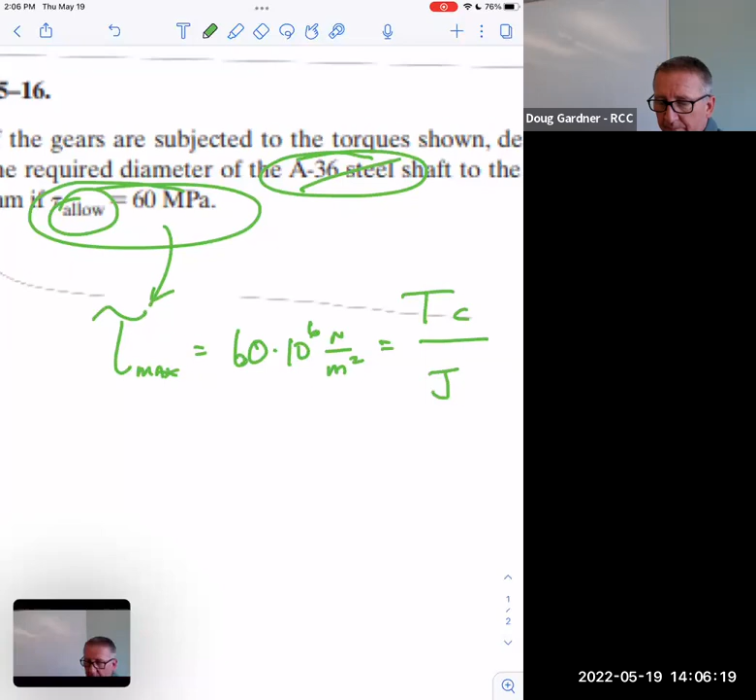So what else do I know? Well, fortunately, in this problem they gave us the torques, so I didn't have to calculate them myself. But which one am I worried about?

Notice this is sectioned into two places. What does this area think is happening? What does that area feel? If you section it and chop it off right before it gets to the next one, because that's what a section was, right? Does it make sense everything in there is feeling 200?

Now if you looked at it from this side, does it agree? Yep, 300 going one way and 100 going the other is still 200. So it's got 200 on both sides. Just like when we pulled on a piece of pipe axially, we said if there's 100 on one side, there's got to be 100 on the other. Otherwise it isn't going to be stretching, right?

If I take this pen and lay it on my hand and start twisting it, does it want to torsion? No, because there's nothing on the other side stopping it from twisting. So it's just rotating along and everything is happy. But if over here I say, no, I'm not going to let you, does it make sense that if I twist this at 200, then automatically this has got to do 200 too, or it's going to start rotating in my hand?

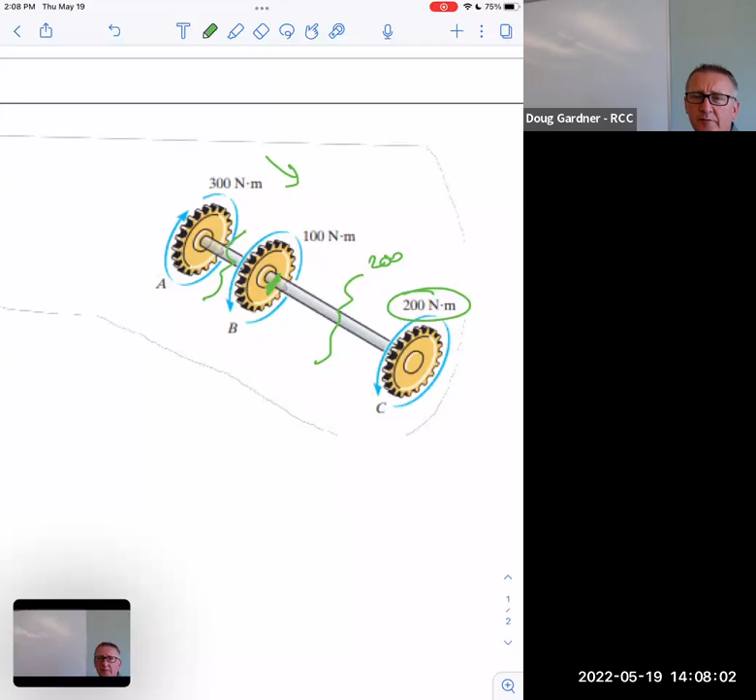So this being fixed, it's not like I'm doing anything there, but if I come over here and go 200, then automatically I'm over here balancing that. You see what I mean? So the right side's 200 and so is the left. And if you take 300 going one way and 100 the other, it is 200, isn't it? If they weren't equal like that, then it would not be twisting, it would actually rotate, not fail to rotate. It's not going to create any internal stress in the member, right?

What about in this section over here? What's happening between A and B? Notice it's got 300 over here, which means the pipe is experiencing 300 all the way through it until just before it gets to the 100. So it's 300. Now is that agreed on the other side? Yep, because it's got 200 going this direction and another 100, so sure enough it's 300 on both sides of that, isn't it?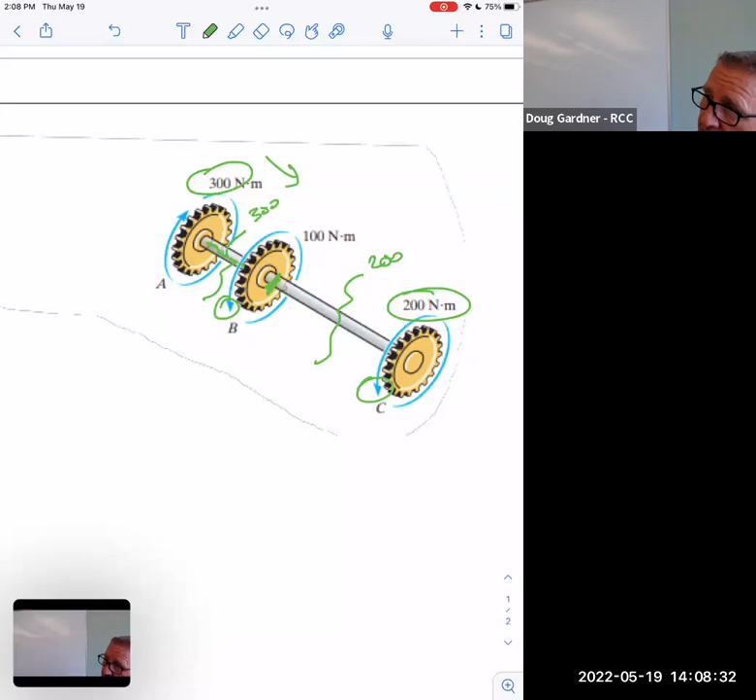See what I mean? So it's like 300 and 200. One part of it's experiencing 300, one part's experiencing 200. Therefore, 300 is the torque I need because I'm looking for the maximum shear, and it's the same pipe all the way through. So that tells me it's going to break between A and B. That's my maximum.

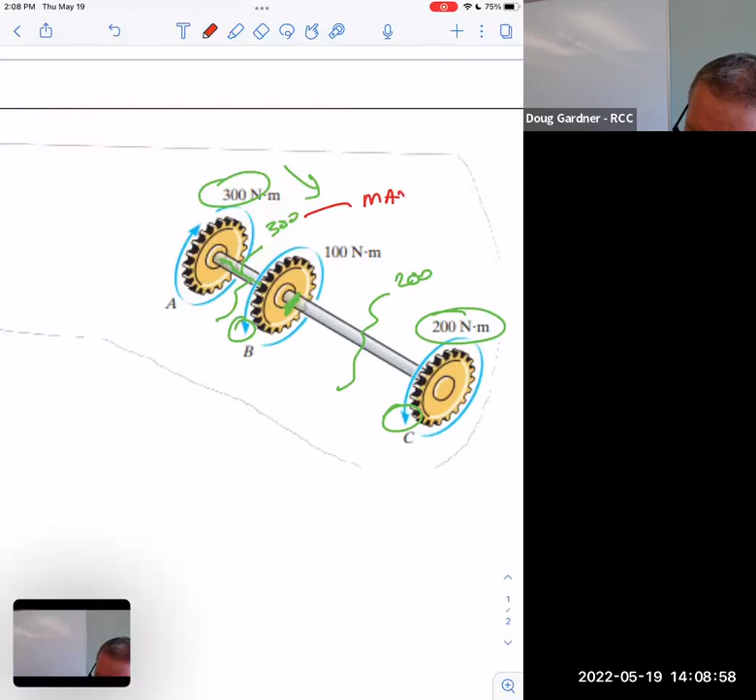Tracking with that? Is that too fast for you? I don't think this is obvious. That took me a while to agree with, I guess is what I'm saying. I got it, but in a different way.

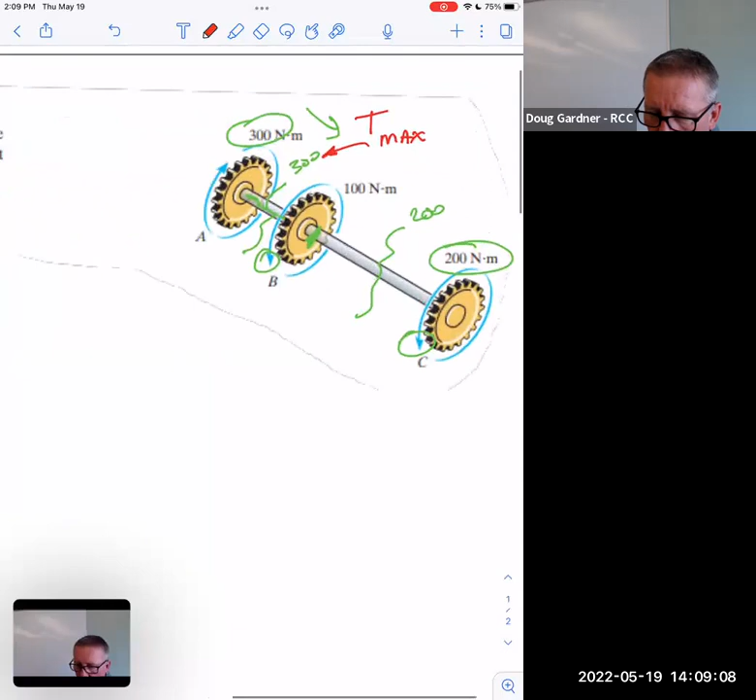So you said 300 minus 100 is 200. Yep, and that's to get me to here. And then that matches the 200 that's on the other side. So I just looked at 200 and 100, like oh, they're going to match right there. So it's the same thing. Yeah. It's hard when it's not stationed on something. Yeah.

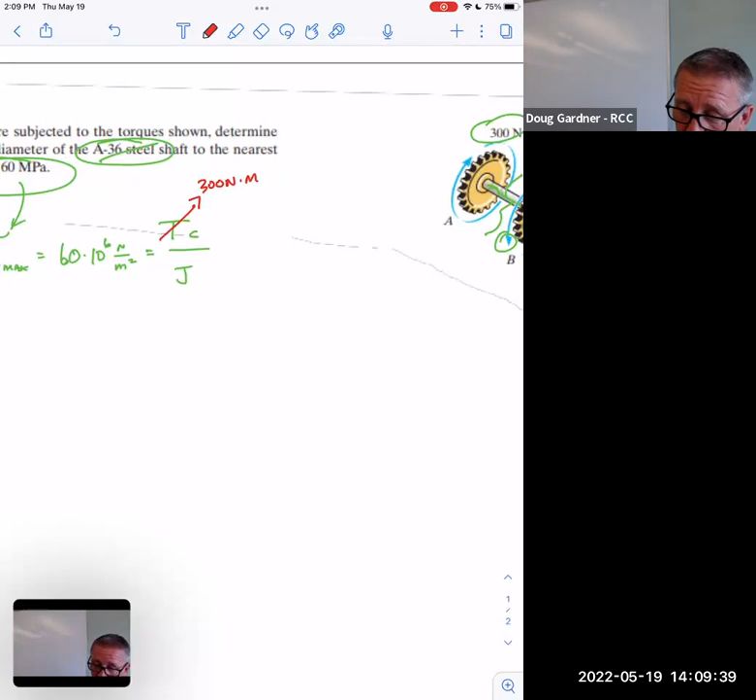So I know the torque, I know the tau max. I don't know C and I don't know J. What is it asking? If the gears are subjected to the torques, that's all they tell me. That's not good, I have two unknowns.

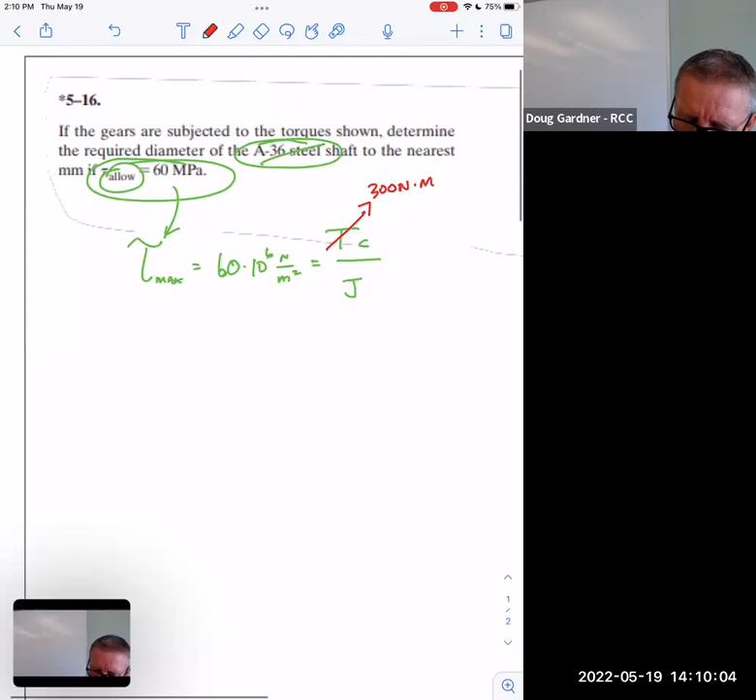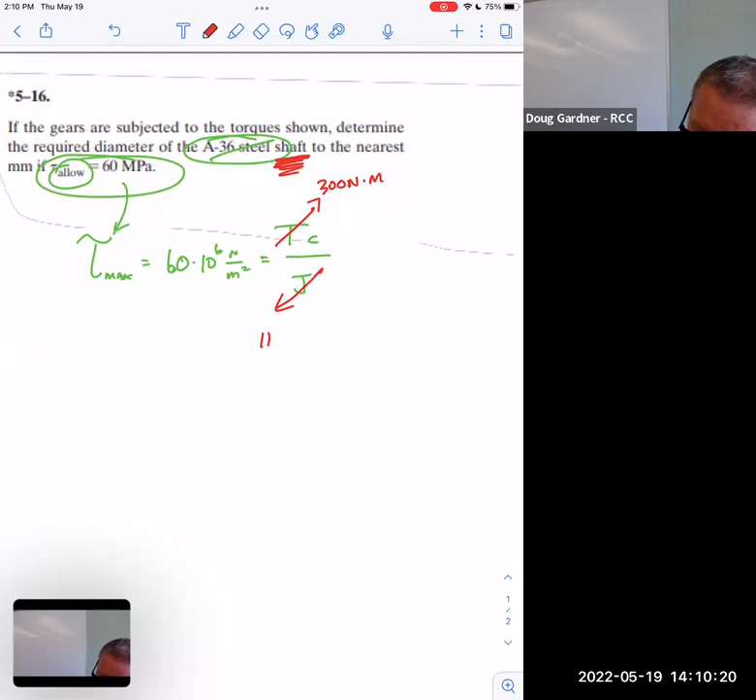All right, what kind of a pipe is this? Is it solid or hollow? Solid. This word right here is the only clue you have. It said it's a shaft, which is code for it's not hollow, so they got to tell us that. What is J equal to if it's hollow or if it's solid? Pi over 2C to the 4th. Oh, it's only got one unknown now, C, so I can solve that.

So 60 times 10 to the 6th, and notice the units are all working. And then there's a C on top, but doesn't that cancel with one of the C's on the bottom? So now that's C to the 3rd. So if I just solve for C, let's see, I'd be multiplying by pi over 2. So I've got 300 divided by 60.

Divided by 10 to the 6th. Ooh, that seems like a big number. Everything else is multiplied to the other side. Then I multiply by 2, divide by pi. I got 3.18 times 10 to the negative 6. Then I cube root that. Notice you have to raise everything to the cube root, or raise it to the 1/3 power. So I'm raising this to the 1/3 power. I got 0.0147.

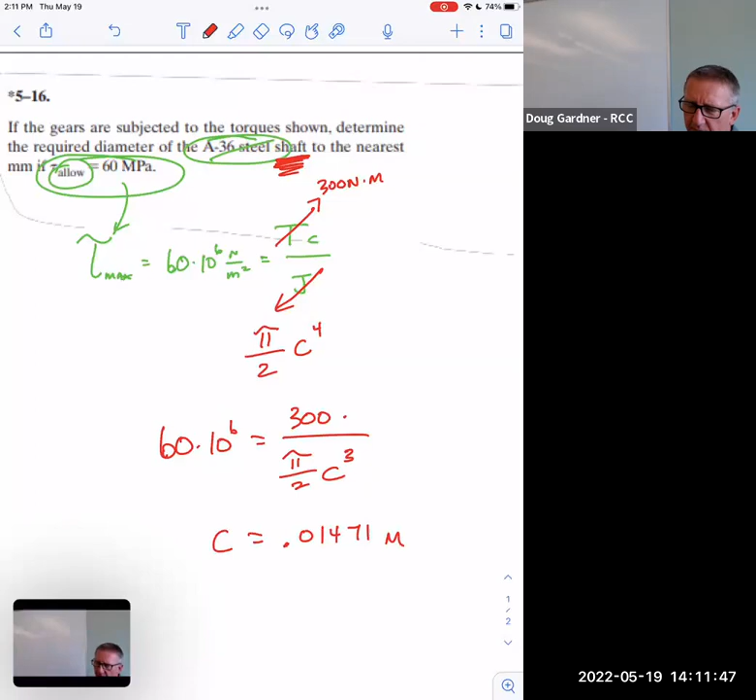Because of the way I took care of my units, this is in meters. Everything I did was in meters. So couldn't I call that 14.7 millimeters if I wanted to?

How did you cancel a C from the top? Just because there's C to the first up here and C to the fourth down there.

You're into the 1/3 power, right? Yeah. Because in the end, and I'll write this out just because it's algebraically kind of a pain, you really have 300, and then you multiplied pi over 2. Actually, you could leave pi over 2 on this side if you wanted to. You could multiply C cubed to the other side. You'd have to divide by 60 and divide by 10 to the 6th. And then pi over 2 is still down there. So I have C cubed equals some ugly number. The opposite of cube is either cube root, which is hard to find in your calculator, or just raise both sides to the 1/3 power. So I just had that decimal and said raise to the 1/3 power.

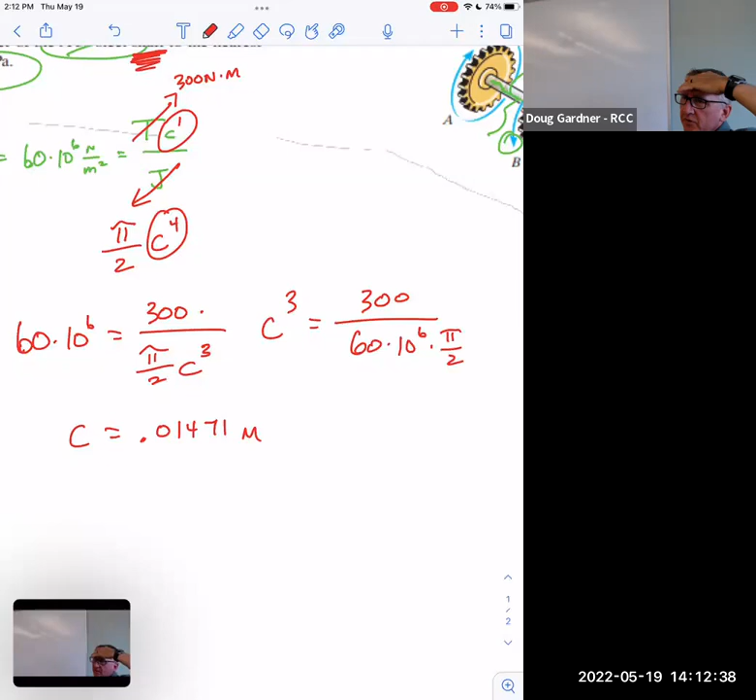Now, what did it ask though? It said, what's the required diameter? Interestingly, pipes are never designated by their radiuses in engineering. It's always diameters. That's not a diameter though. Does it make sense? You get it wrong in the back of the book. That's a radius. So if that's a radius, then I'd have to double it.

And I'll remind you of this because I've showed you this before, but the symbol for diameter is like a circle with a line through it. You'll see that in different places, and that's something you want to know at some point. So I got 0.0294 meters, but of course that would be 29.4 millimeters.

Do you notice this last statement in here though that I ignored up to this point? It said to the nearest millimeter. So it said, I want you to do it in millimeters, but then it also said to the nearest millimeter. So that means even 29.4 is not in the back of the book. What's in the back of the book?

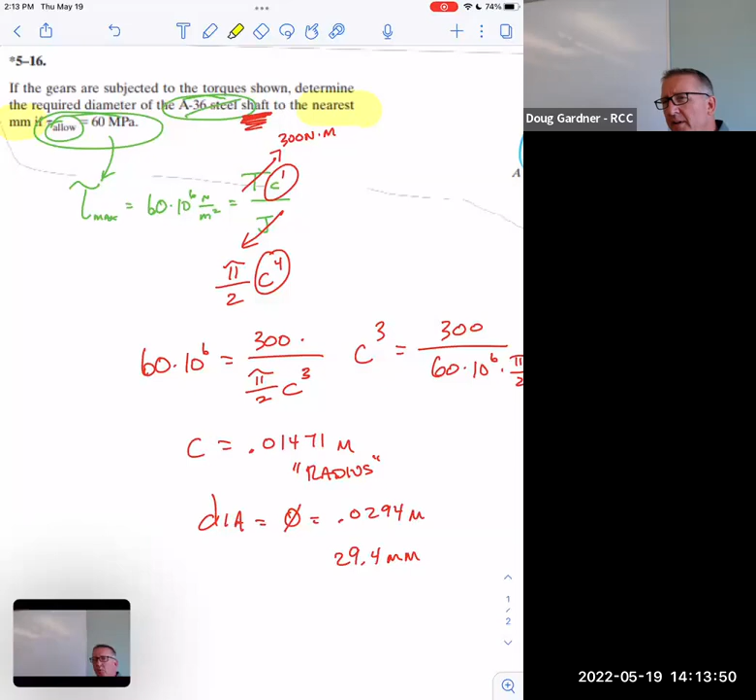It's very important. Think carefully about this. If you could not order parts of millimeters, you had to pick 27, 28, 29, 30, 31, 32, 33 - like that's your only choices. What do you pick? You pick 30. You don't round off, you round up because 29 will break. You understand that? So even if it was 29.01, it would be 30. So we're going to see 30 in the back of the book here because you want to round up so it's strong enough, right?

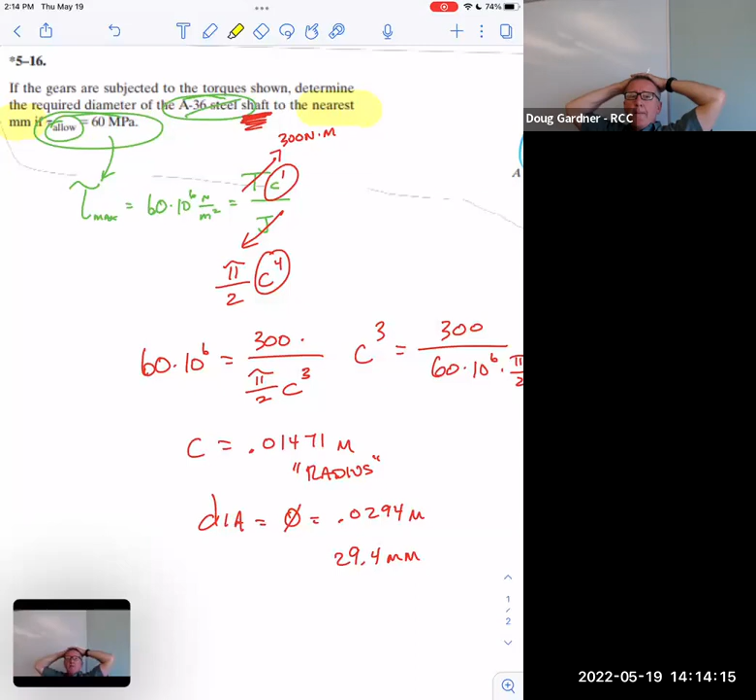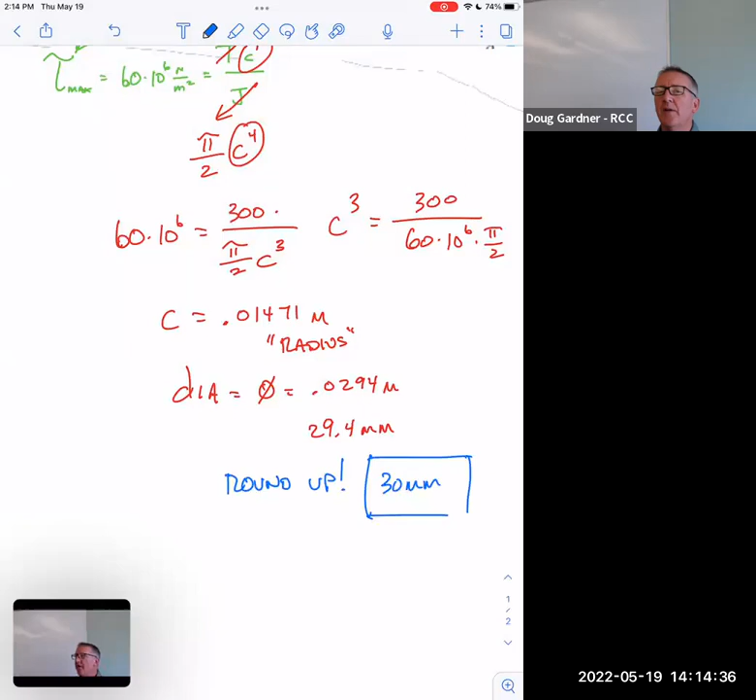That's what you're going to see in the back of the book. But it's not different, it's the same math we just did, right? But again, isn't that a very practical problem? In other words, if you design backwards, it's kind of like, okay, I already chose a material. I don't know why I already chose a material. It's got a certain tau allowable, and I've got a certain job I want it to do.

Maybe these pulleys are running the air compressor for the AC unit inside your car, and some of the cool stuff that's in there. You got those serpentine belts that run all this stuff in there. And so I already know what I needed to do. And now it's like, well, pick a shaft that doesn't break then. I need it to be light, right? So I'm going to choose aluminum. I want it to be lightweight. It's a race car, so choose aluminum. Okay, great. All right. Well, then what diameter does it need to be so it can handle all that work? Very practical question. Beautiful question.

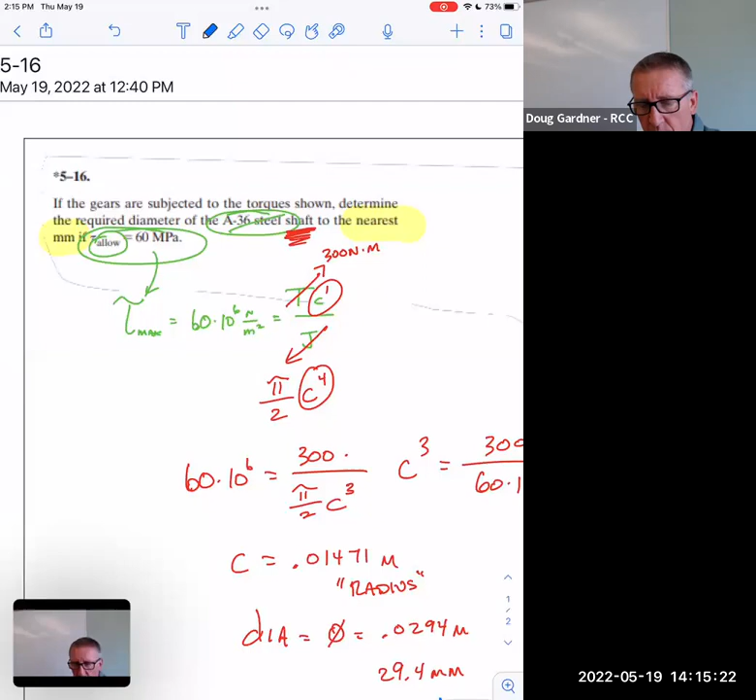All right, I think I want to stop there. I intended to teach 5.2 - that was 5.2. I intended to teach 5.3 today, and I could easily squeeze it in, but you guys got a test to take over the last section, and that didn't feel terrible, right? I feel like maybe I can just ignore this and get the test over with, and I'll figure this out over the weekend on Monday or something like that. So I think I'm going to squeeze 5.3 in next time and not say anything about it.